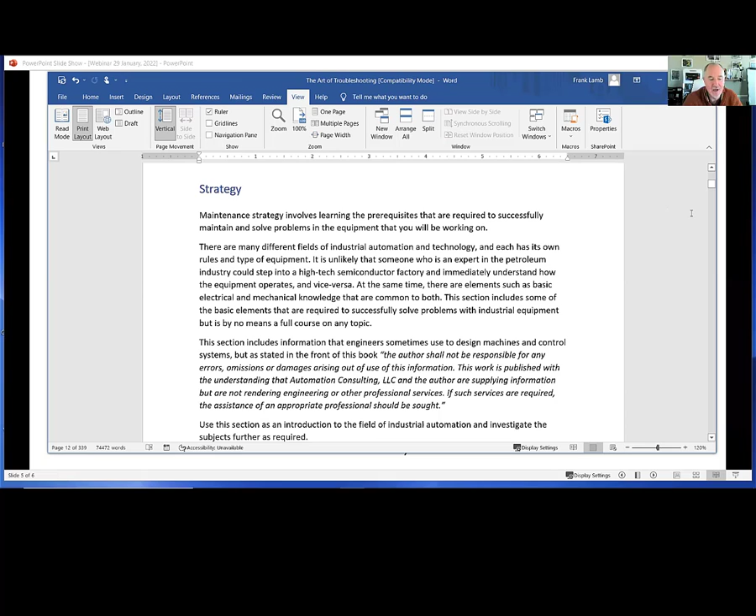Talk a little bit about maintenance strategy, learning prerequisites that are required to successfully maintain equipment, which a lot of people will already know. And I'll say, well, if you already know a lot about this subject, skip ahead in the book. There'll probably be something else in there for you.

I mentioned, of course, this is if there's errors, omissions, or damages arising out of the use of this information, not my fault, right? Don't use this as a Bible.

This talks about some of the different kinds of maintenance. Sometimes people work in a plant and they don't know how the management of maintenance and the systems work. So I described some of the acronyms that are used in maintenance. MRO, people hear that and they don't know that it necessarily stands for maintenance, repair, and overhaul.

A lot of the types of maintenance that fall under this are like preventive maintenance, corrective maintenance, predictive maintenance. Those are pretty easy to figure out just by the titles, right? Periodically inspecting and servicing equipment, planned or scheduled maintenance, condition-based maintenance — when there's a problem, that thing's leaking oil, let's go fix it. Corrective maintenance is when something breaks down unexpectedly.

That's probably what most people think of — hey, that machine's down, we got to go get it up again because they're losing $10,000 an hour. Talk about that. And then predictive maintenance, which has to do with this motor has so many hours on it, it's time to replace the seals or bearings, or service the bearings before it breaks down. So that would be another kind of maintenance.

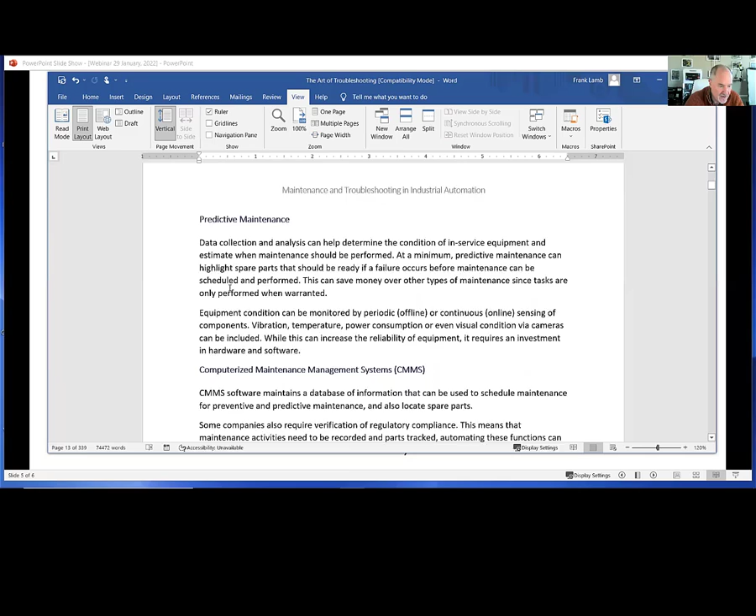So, and then I have, again, a little quiz, and I talk about CMMS systems. You can buy software that plans, schedules, all that. It's kind of neat stuff. You can go find those online yourself, right?

So then I ask, what are the three major types of maintenance? The answer is right there above you. So there's no real difficult questions in here. There are some calculations for those people who don't like math a little bit later.

Which is the most expensive type of maintenance, right? Well, that would be corrective maintenance, because when things break down, hey, your line's down, you're losing a bunch of money and you're having to replace something, probably with something else new, right? And then what kind of software can be used for that. So very general stuff there.

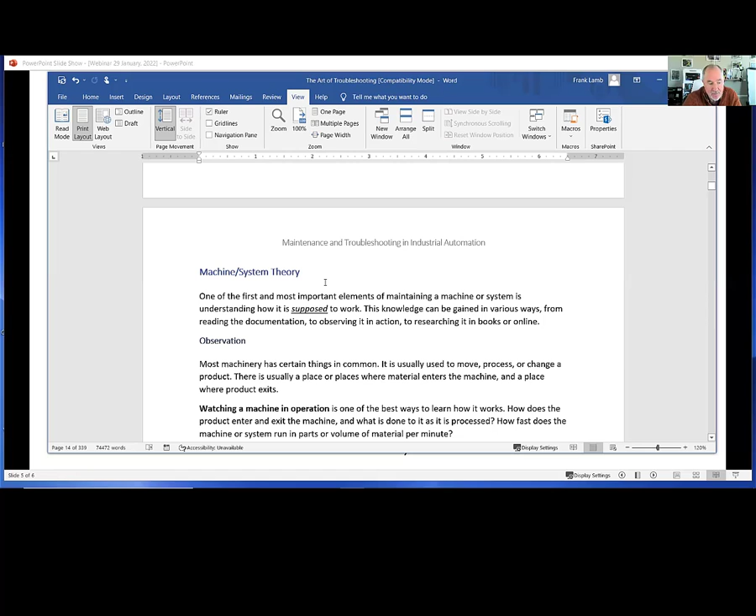The machine and system theory — this is kind of looking at a machine and telling what's wrong with it. And I would even go farther to say, a lot of times you can look at machinery and tell what it does. This week, I had an interesting experience.

I was called by a company about 500 miles from here in North Carolina. And they had a guy who was their Siemens expert, and he actually died of COVID, believe it or not.

So they suddenly had no Siemens support, and they had a machine that really needed work on it, maintenance and upgrading and that sort of thing. This guy had been involved in it, and suddenly they didn't have anybody to do that. So they called me up. I went out there for 3 days and we worked on that machine.

We did a lot of Siemens training. And I didn't know how the machine was supposed to operate, but you can go look at it and you can tell a lot of things.

In this case, there were trays and these little aerosol containers, and it just palletized all the aerosol containers. Turns out what they do is they palletize the aerosols after they make them. They put them in a warehouse for a week and make sure they don't leak. Bring them back, test them for leaks, run them back through the machine, repalletize them, put them back on trays, put them back in for another 2 weeks, rerun it through the machine, test it for leaks again, and then it's released to the public.

So at the time that all these little aerosol nose sprays or whatever come out, they have been through 3 weeks. It's almost like aging whiskey, I guess. It's kind of interesting. But this whole palletizer and depalletizer system, that's all that did - it's just a Siemens machine, and it put things on trays and took things off of trays.

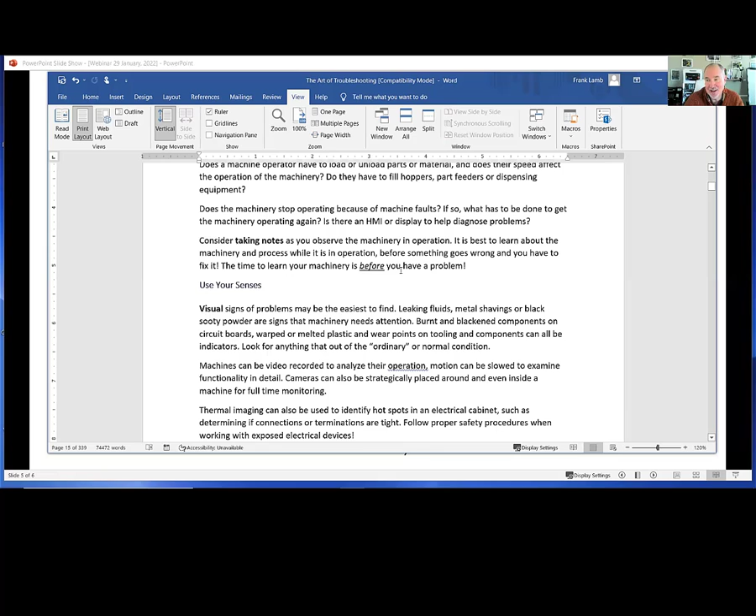Take notes, I'm a big believer in that. Write things down. The time to learn your machinery is before you have a problem, right? You want to watch it in operation before you ever get to the point where you have to fix it.

Visual signs of problems are easiest to find - leaking fluids, things like that. Thermal imaging is kind of a visual thing too - you point a camera at it and you can see where hot spots are. You can listen to machines, listen to the sounds they make - grinding, high-pitched squealing, those kind of things cause problems. Smells - you can smell burning rubber, you can smell burning oil.

So this isn't really meant to be a troubleshooting tip so much, but it is a, how can I check out the condition of the machinery? Very simple stuff. And I'm only on about page 16 here, and I think 5 or 6 pages are just table of contents.

Then I start talking about the products and types of machinery, and I go into much more depth on that later. Knowing about the product being processed - well, hopefully if you're working for a plant, you're going to know a lot about your own product, you're going to know how it acts in the machinery. And then I do cover later the classifications of machinery - I talk about packaging machines, robots, pumps, conveyors, material handling machines, things like that.

And then this exercise really - this comes from a lot of times when I do PLC classes, we have something that says, what do you make in your plant? What does your process look like? This is meant for the person to just keep records and answer themselves.

Sometimes we talk specifically about, hey, are you here to learn oil and gas processing, or are you here to learn automotive manufacturing, or are you here to learn chemicals or FDA validated pharmaceutical or medical device equipment? It's all different, they all have different rules and things like that. So this is, there's no correct answer for this. Are your products consistently the same, or can they vary depending on the process? Lots of interesting questions there, but this doesn't have an answer in the back of the book.

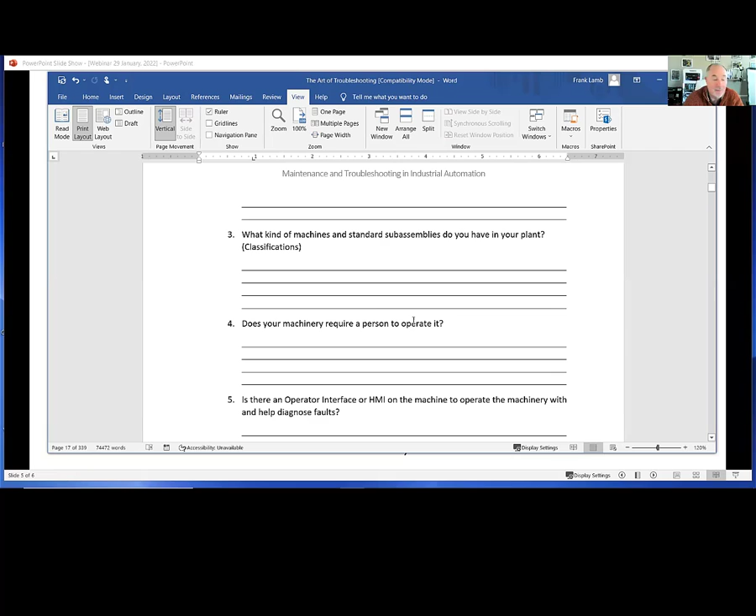You can't look up the answer to what your machine produces. Does your machinery require a person to operate it? Often, even if it's an automated machine, there is a machine operator there. So that's where we get into later, talk to the operator to get some of your information.

Do you have an operator interface or HMI? Do you know if that operator interface is an HMI or is it a computer? Because the implications of that are very different.

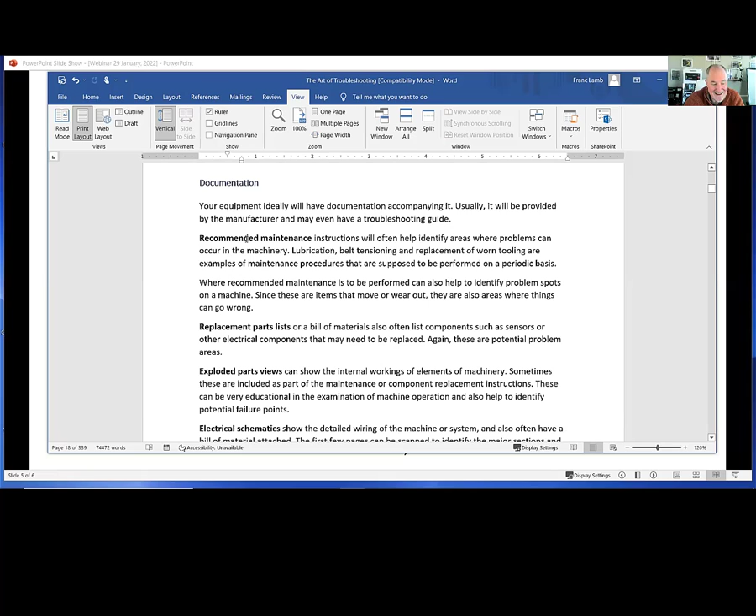List some of the characteristics of your machinery that can be sensed visually. Lots of stuff. Documentation. What kind of documentation would a machine have, and what can you learn from it? So that's what this is.

Talk about exploded parts views, replacement parts lists, P&IDs. I noticed that Dan Ryken's on here. I think he probably deals with P&IDs if he's in the process industry. PLC programs, studying that.

So I do go into more depth on some of these things, and again, there's no correct answer. What are some of the documents and programs you have that would be appropriate for diagnosing problems on your machinery?

Then I start going into some more technical things. What is a powertrain? What are some of the mechanicals, things you need to know, right? Power transmission, bearings, just a simple grease fitting kind of thing there.

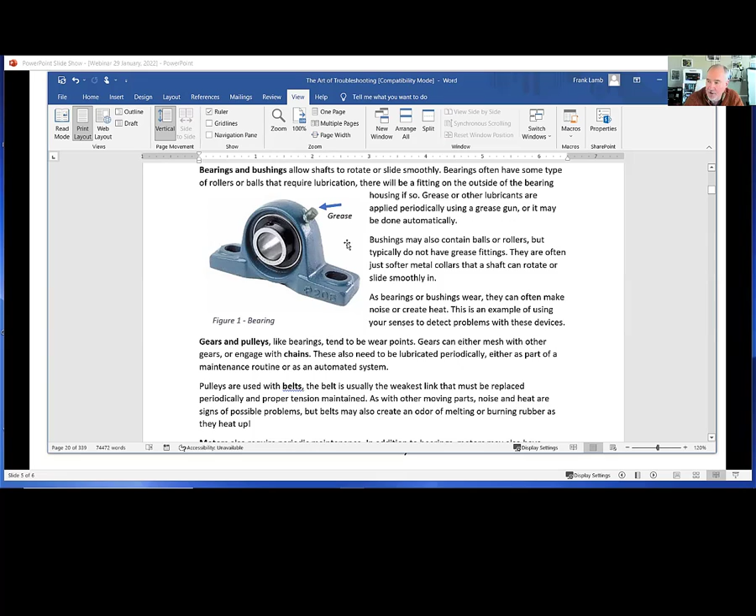Now, I'm not going to tell people how to grease a bearing, but there is a fitting here. You're going to learn more about that in the maintenance manual for your machinery. Hopefully it will show you how to do a lot of that. Gears and pulleys and motors, very brief stuff.

This is something I run into a lot, is broken couplings, right? This stuff I mentioned is generally inside of a housing, so you kind of have a hard time getting at it, but this is the cause of a lot of the problems I've run into: broken couplings, slipping couplings, your encoders will get off, and that sort of thing.

Talk a little bit about seals, clutches, mechanical adjustments. So this is very general. Ventilation.

Go into some of these things, and then have some simple questions, right? Some of the possible failure points in this blower picture, pop-up diverter. These actually do have a list of things that I put in the answers at the end.

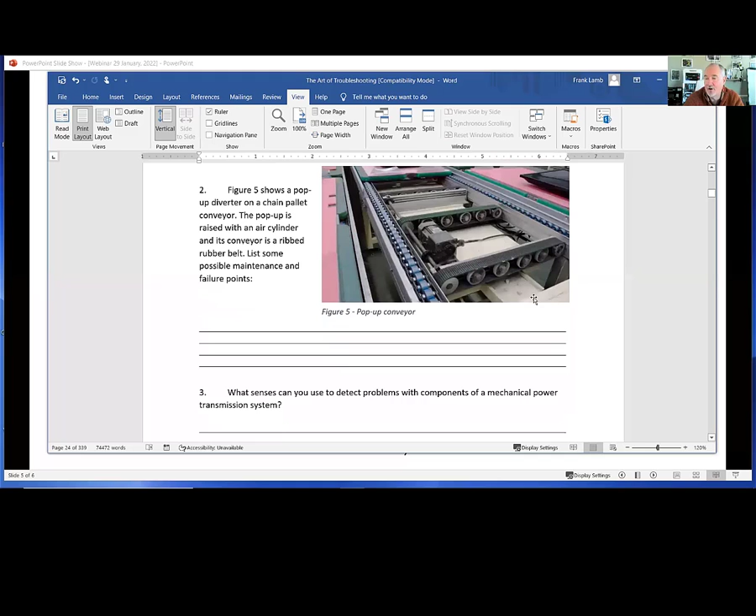By the way, it would take a long time to go through the whole book. This is figure 5, and there are now 300 and some odd figures in this book. So this goes on and on and on.

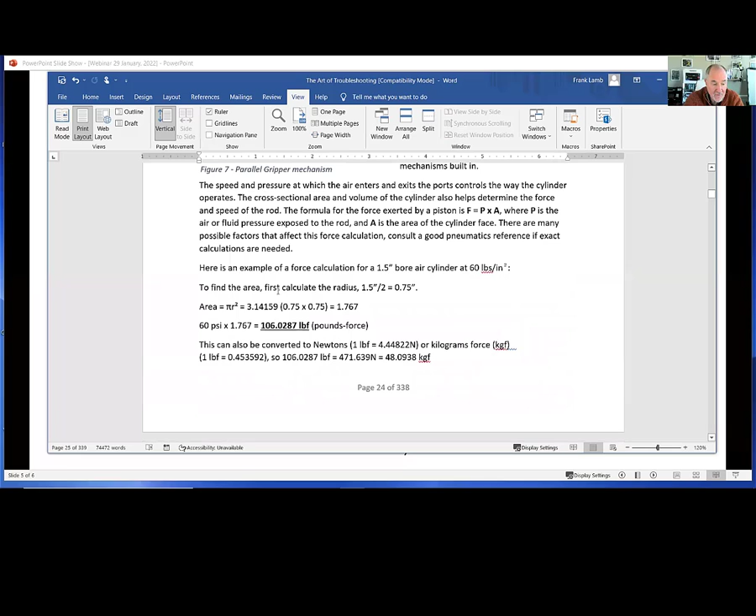And then I start getting into pneumatics, talk about some of the mechanisms in the pneumatics, do some calculations, how to calculate force. Most technicians don't necessarily have to do this, but this is a design help thing, right? Calculate the force for a...

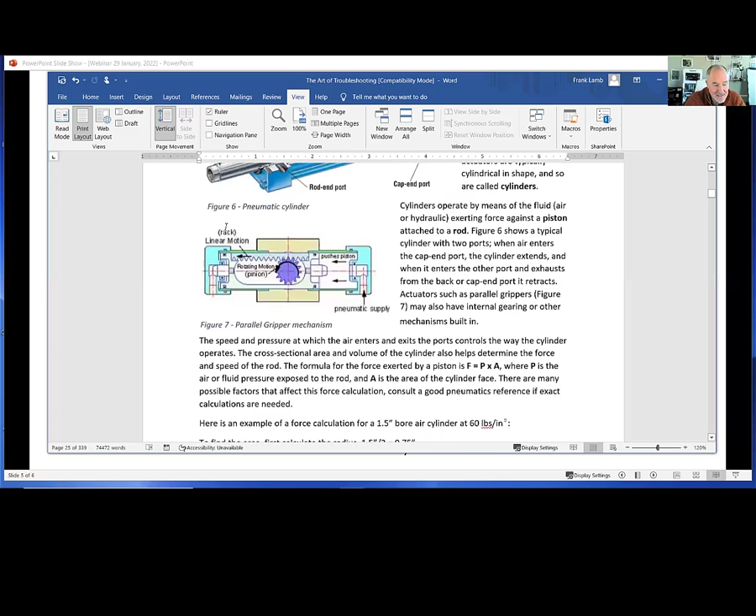A 1.5-inch cylinder at 60 PSI. It's just F equals P times A, but there's more to that than that—you have to calculate a lot of things. There's pi in there because the surface area is round, and you actually have to subtract the surface area of where the shaft joins the piston. I kind of mentioned that in passing here, but I don't go into great detail because, again, it's not really a design class.

Talk about flow controls, put some helpful things in here, talk about the symbols for different things, mufflers. I had to stick that here at the end. This is actually from one of my previous books. This is an easy way to read pneumatic symbols—kind of a tutorial on it. What do all these different things mean?

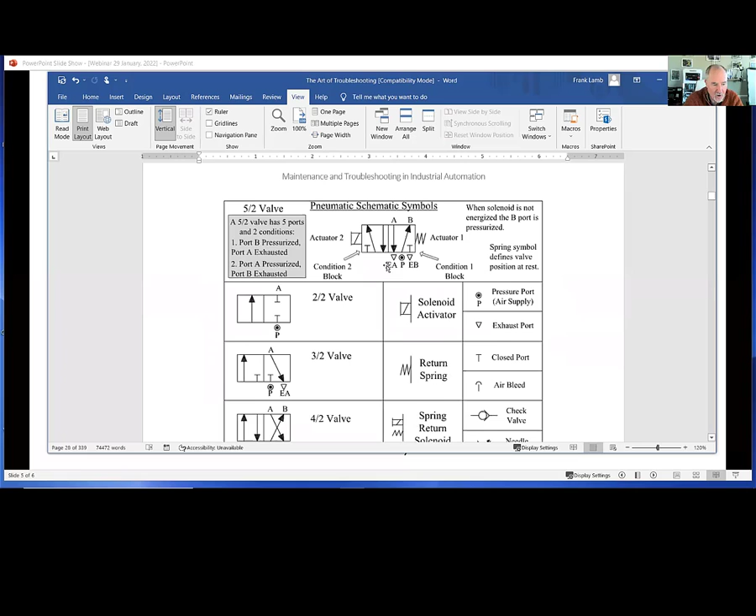I go into a little more depth and actually show how these things move back and forth across. I've made videos about these before, what these arrows mean, what these ports mean, right?

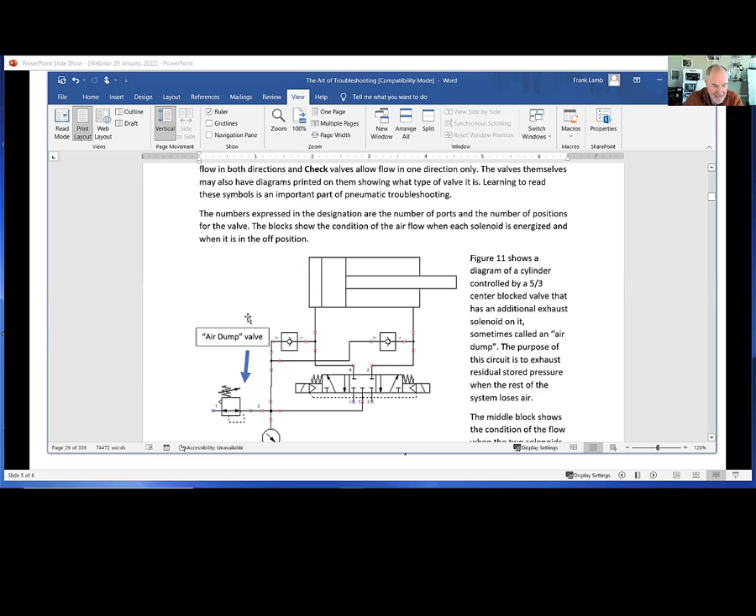And then there is a more in-depth pneumatic diagram that I plan on putting in the back. And then here, this is a simple diagram that uses a valve, and you can kind of talk about how this shifts back and forth and energizes some of the different ports. So, lots of pneumatic stuff.

I actually have a physical picture here, talk about what the different parts are, shutoffs, filters. I go into great depth on the specific machine that I use as an example for troubleshooting at the end of the book.

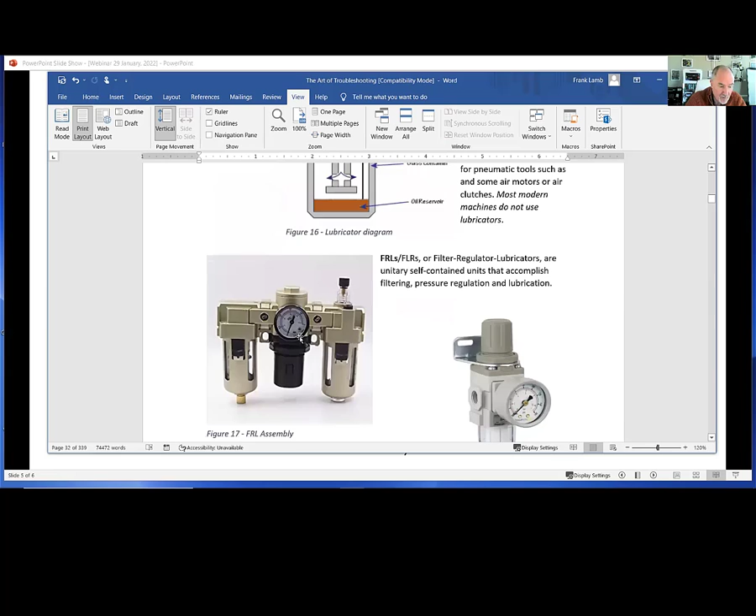Talk about filters and regulators. Sometimes people don't get this in college. Lubricators—I mentioned the fact that we don't use a lot of oil lubricators anymore because it just really cruds up your air system, right?

There's a lot more of this available online. You don't have to take this as everything, but I do talk about all the different things that might require attention. I'm going to kind of breeze through more of this.

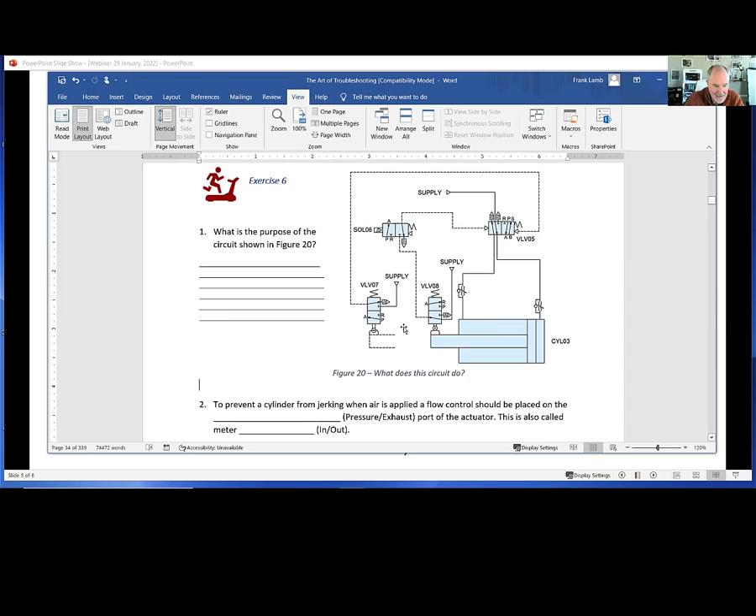Then some simple questions here. What type of valve might be used on this pusher cylinder? There's several right answers there. Talk a little bit about safety, make somebody do a calculation.

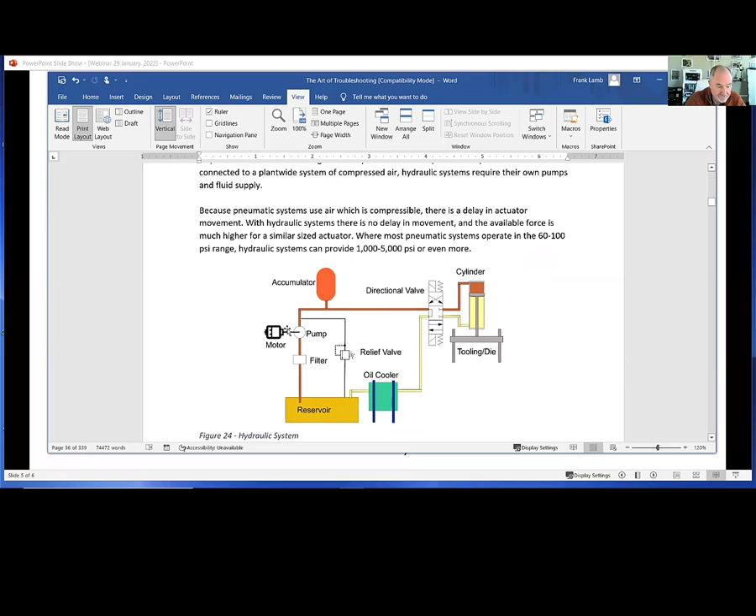I do the same thing for hydraulics. I actually looked online for a good diagram for this. I couldn't find one that had everything I wanted, so I had to draw this myself. The ones I found a lot of times didn't have an oil cooler in it. So this is a kind of a sample of a lot of things you'll find, but people who are hydraulic experts will find other things to put in those systems also.

So talk about lots of that, talk about the difference between hydraulics and pneumatics. Why would I use one over the other? What's the biggest cause of failure?

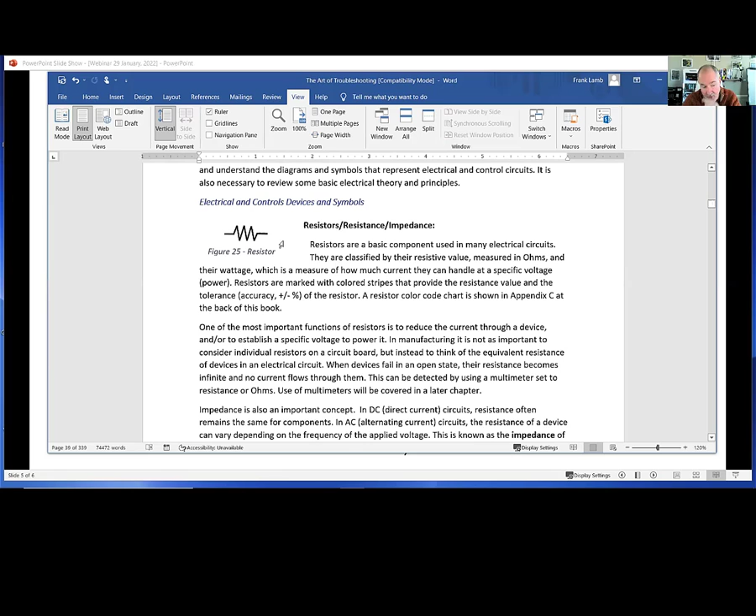Then I go through electrical. The reason I put some of this stuff in here is because sometimes I get people in classes that haven't had electrical training, and I need to at least put the basics in here and how resistance and some of that stuff works. You can go in here and, of course, get a lot more in-depth training, but I want people to understand what the symbols are. And if they're straight out of high school and haven't had electrical training, this will give them a start.

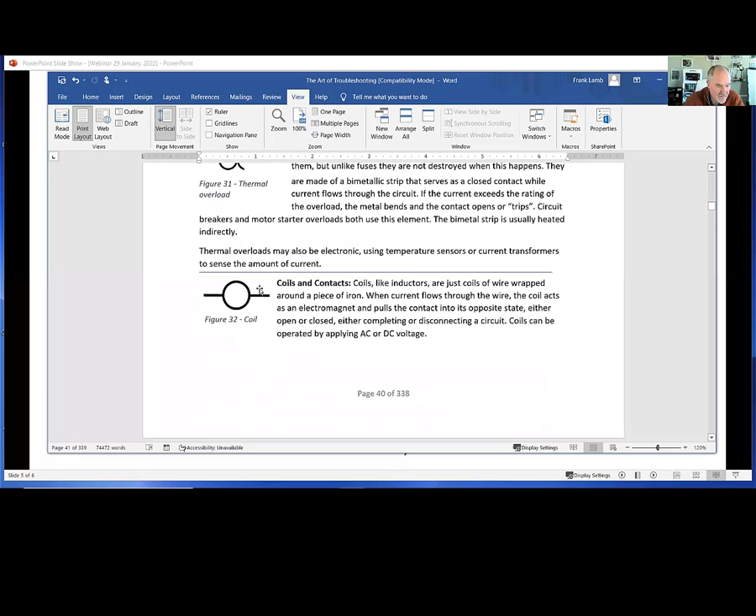And I do, again, some very simple calculations and things here a little later, showing people some of the symbols they would find in electrical diagrams for solid state devices, things like that.

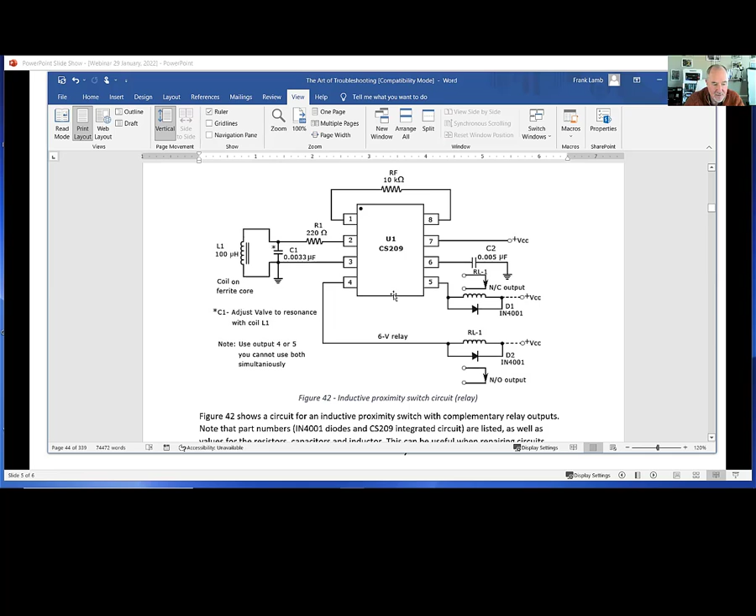Chips, right? This is actually an inductive prox. People don't realize there's actually a little processor in a lot of proximity switches. So this thing just does some switching, and you can get very complicated for some of those little circuits.

So again, another little test. I think there's about 40 exercises in here. Go through basic electricity calculation, series parallel, without going into great depth. Again, it's just meant to be a quick tutorial.

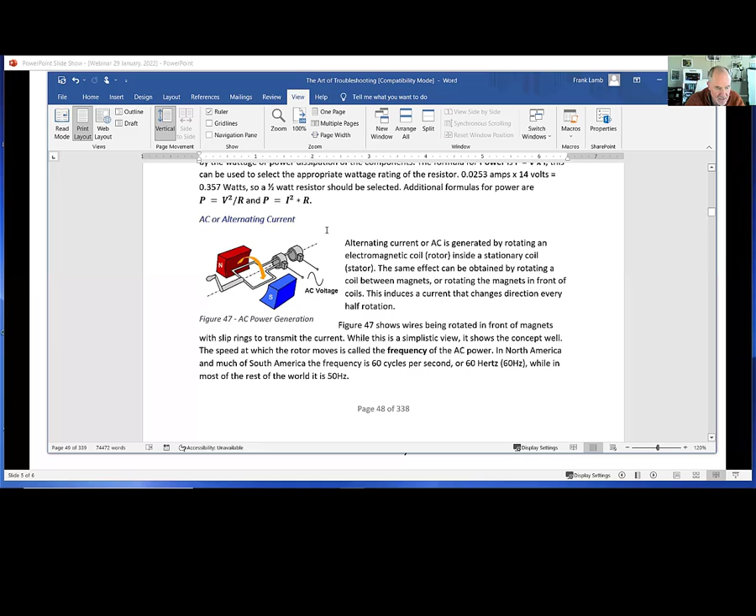Go into AC, explain what that is. Talk about 3-phase power, explain what that is. Explain the fact that when you get a voltage on AC, what you're getting is the effective voltage, not the peak voltage. So you can actually have much higher voltage at the peak of your electrical circuit than you're actually reading. But your meter is going to say 480 volts or whatever—that's the effective average voltage across those phases.

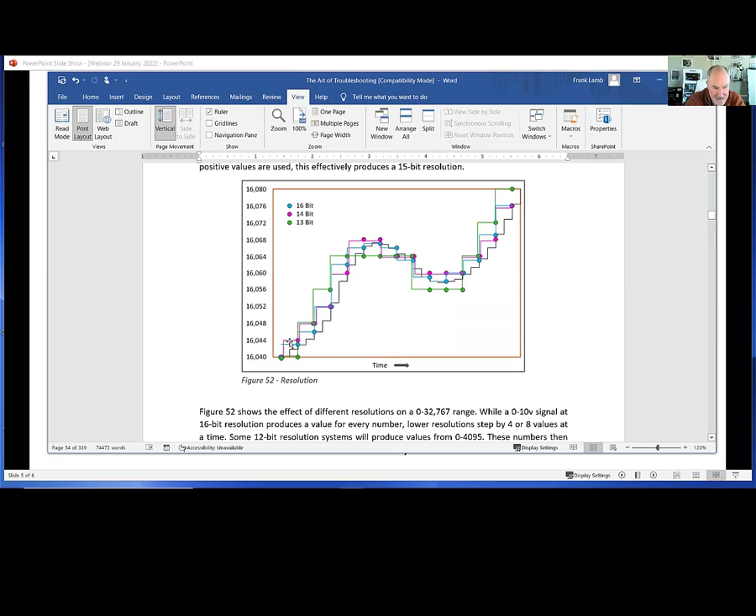Then I go into digital and analog, which probably most people already know. This is, again, out of my PLC book. I talk about resolution—what does 16, 14, and 13-bit resolution mean? In most cases with PLCs, it means the values will jump by 4 or 8 or something like that for each increment. It'll go to the same value of around 32,000 something, but it may jump by little increments, and that's what the resolution means.

Talk about RS 232, 485, things like that. There's a pretty good, I do serial here, but I also do a pretty good Ethernet model in here. I went into a little more depth on Ethernet than I have in my previous books.

Talk about a lot of the different things—what are all these things? What is a NIC? What's CIP? What's a hub or a bridge? Some definitions. Talk about IP addressing, class A, B, and C networks, how those are built up. A lot of times people type in their IP addresses and they don't know where all this comes from.

Talk a little bit about industrial protocols like Profibus. Mention pinging—sometimes I mention somebody needs to go ping something and they have no idea what I'm talking about.

What time we got? About 35. What else we got in here? I'm only less than a quarter of the way through the book, so I'm going to get to some of the more fun parts.

Lots of stuff on numbers, right? We need to know BCD and things like that, data types, double integers, etc.

Talk about devices, relate the physical device to the circuit drawing for it. Talk about sensors, right? I've kind of skipped ahead here, but talk about proxes, how they work, Hall effect sensors, how are they different than a prox, the different kinds of photoelectrics.

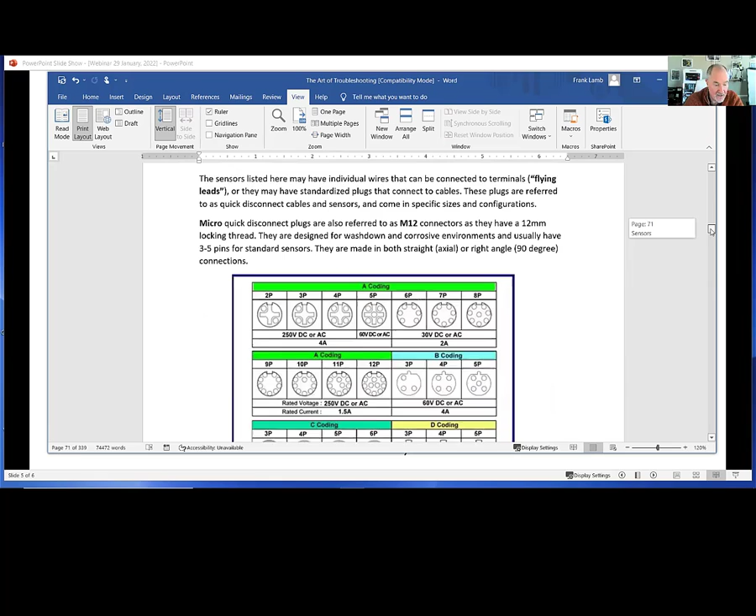M12 connectors, some of the different sizes. I kind of threw this in here at the very end. Talk about M12s and M8s and what the different configurations are. Can't just buy any M8 cable and expect that it's going to mate up with your prox switches and things.

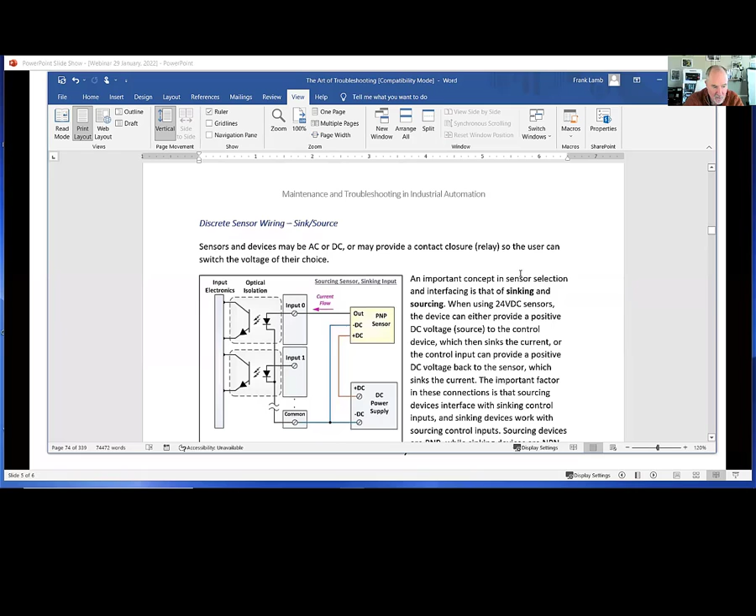And then lots of questions, like what's the most reliable type of sensor, that sort of thing. Talk about the wiring, right? This was out of my old PLC book. What is sourcing and sinking?

That's always very important. Special purpose sensors went into LVDTs and load cells, thermocouples, a lot of different kinds of things in here. There's a nice multiple LVDT picture. This was a project I did a long time ago with LVDTs measuring something.

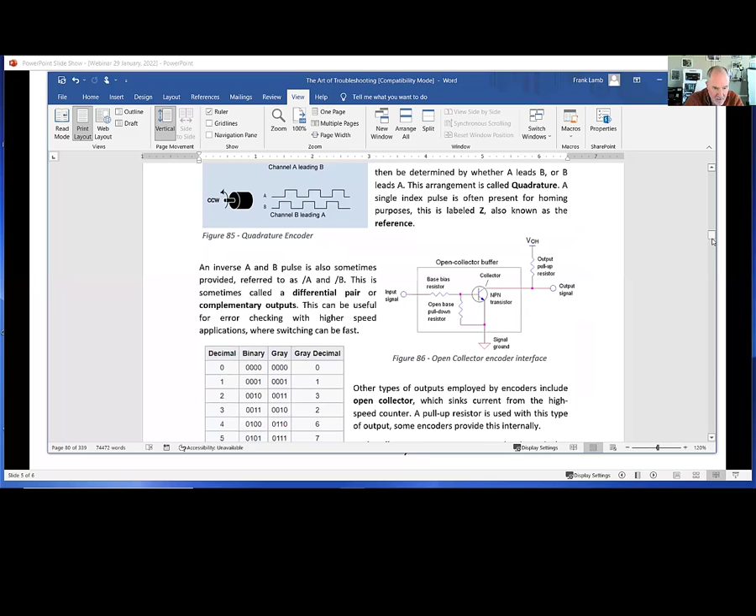Encoders, how do encoders work, quadrature, etc. This is a resolver, which is sort of like an encoder. Barcode readers, go into that a little bit. Then I start getting into, I think, machine vision somewhere in here.

Talk about sensor troubleshooting, barcode troubleshooting. Probably having a known good part, I mentioned that at the end of the book. I go over troubleshooting itself for quite a bit.

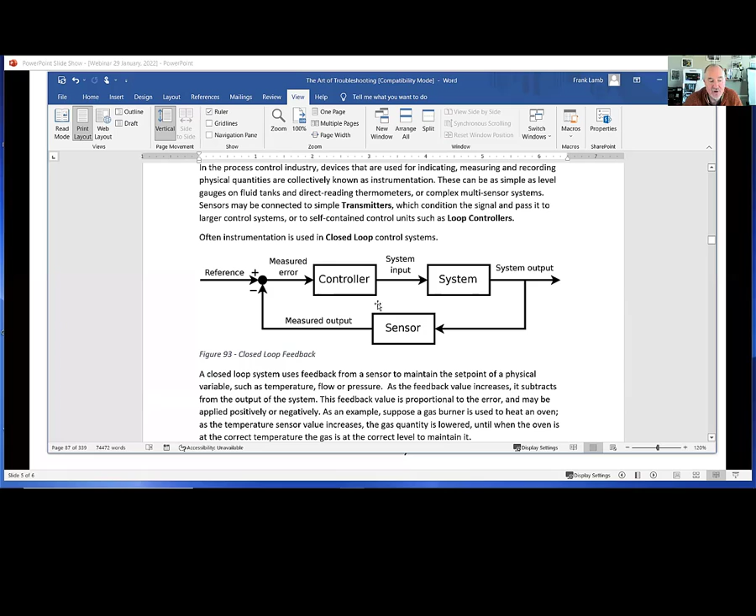Instrumentation, I kind of stuck this in at the end because even though there are a lot of I&C books out there, for people that work in the manufacturing industry, they need to know what instrumentation is, what an instrumentation technician is, which is not what most people are when they go into an automotive plant. They don't know what an I&C person is. They don't use these loop controllers. They don't use flow transmitters and things like this. They use more discrete manufacturing things.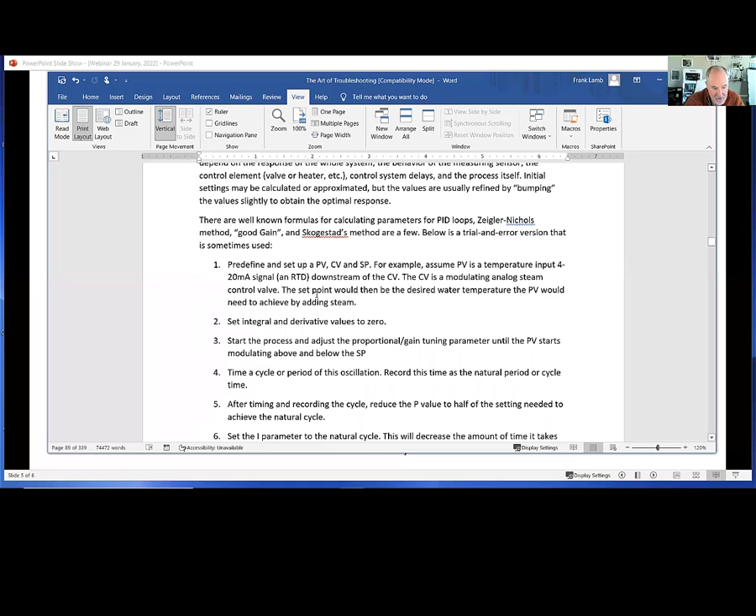So I go into more depth on PID, how to set up PID. There's a couple good tips in here, how to start out to figure out how to set your parameters. I have two different methods of doing that in here.

Modifications to parameters, what they mean. What is a closed loop system? Very basic stuff. Go through P&ID. Sometimes people hear P&ID and they think I'm talking about a PID. No, that's a different thing, right? Piping and instrumentation diagram. This doesn't cover everything about these, but it does give you the general concept of what a lot of these letters and things mean and what a lot of these shapes mean. You're going to see these.

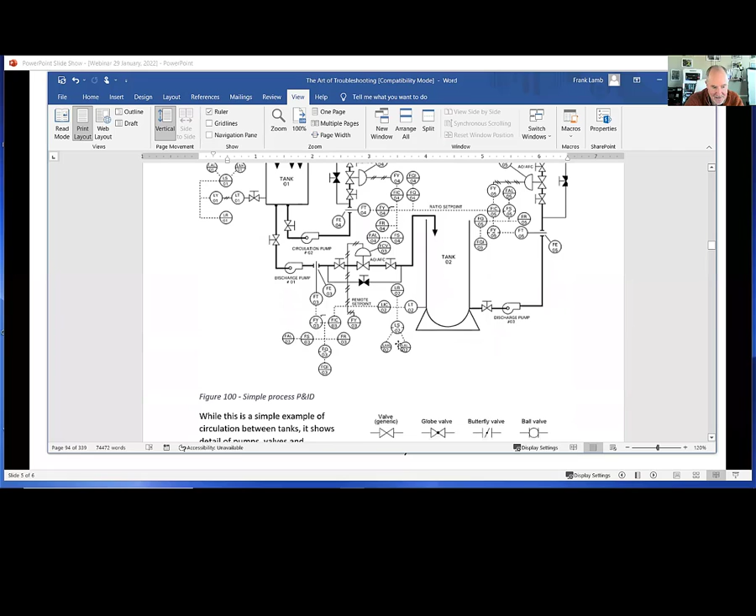And then I give a couple examples, right? There's a very simple one, just a tank filling another tank, with a bunch of little symbols on it. Explain what some of those things mean. Valve symbols, some very generic stuff.

This was machinery that we built at Wright Industries that was actually not process control, but they forced us to write P&IDs for machinery, which was very unusual, right? You didn't have symbols for a lot of these things, so you just drew a big box. This took mortars, took the nose cones off of the mortars, and extracted the energetics, actually drilled a hole in the little nerve gas containers inside. So as you can imagine, human beings can't go into this machine. This all had to be done automatically.

Safety systems, now this I went into pretty good detail on. I went category 1 through category 4 safety systems, talked about the performance levels and how people classify safety systems, talked about the history of where a lot of these things came from.

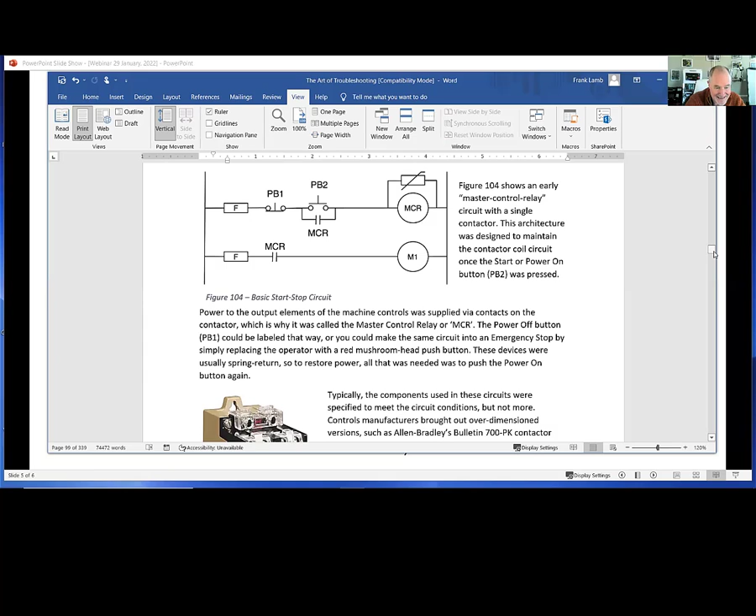We used to use MCRs like this, and you can't do that anymore. This is an old single channel, and in the 90s, this was what I dealt with. You didn't have dual channel systems back then. Then they came out with self-monitoring start-stop circuits with interlocks and things.

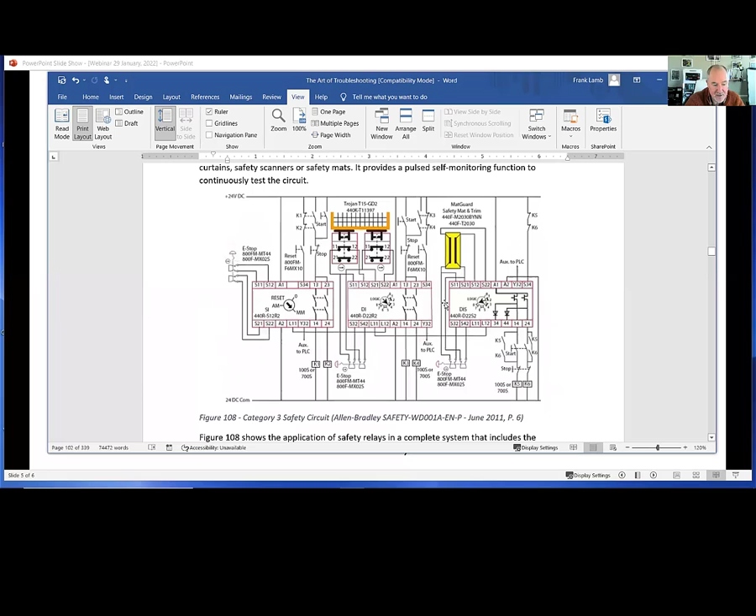They were still single channel, and then they started getting into dual channel, category 2. So I did some of the basic diagrams here, then showed a category 3 system with guards, and I go into much more detail on this at the end.

So I'm going to show you kind of at the end here. I will probably skip ahead a little bit. Category 4, talk about what those are. Safety system components, some of the different things you'd see, direct opening, interlocking, input components, etc.

More on category 4, dual channel, right? Ask lots of questions about it. And then, like I said, there's a lot more on this at the end.

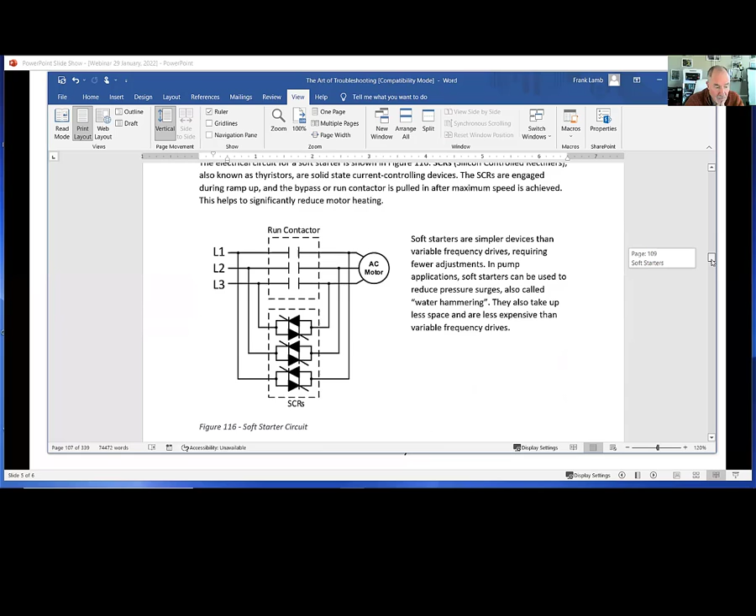Motor control, starters and overloads. How are they wired? Go through just some of the diagrams and things. This is a soft starter, right, this is something that brings the current up slowly rather than just slamming it in.

Then I get into a little bit into VFDs and how that works. I use a PowerFlex 40 as my example and go through all the wiring of this.

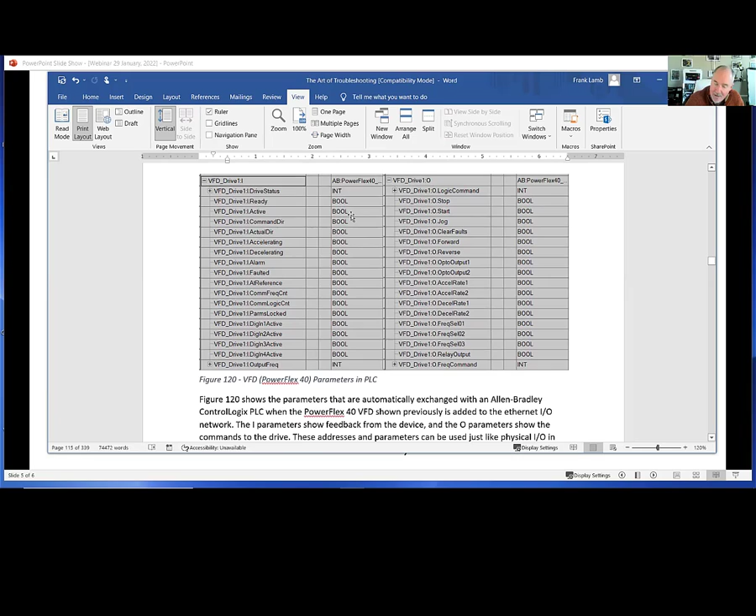Go into how the PLC commands directly control this, because a lot of times you don't wire your controls into your drive, you just use commands. You'll use Ethernet IP or something, and then there's a physical drawing of the front accessible controls. You can just push the buttons on them. And we may create an exercise using all this that people would do hands-on for that.

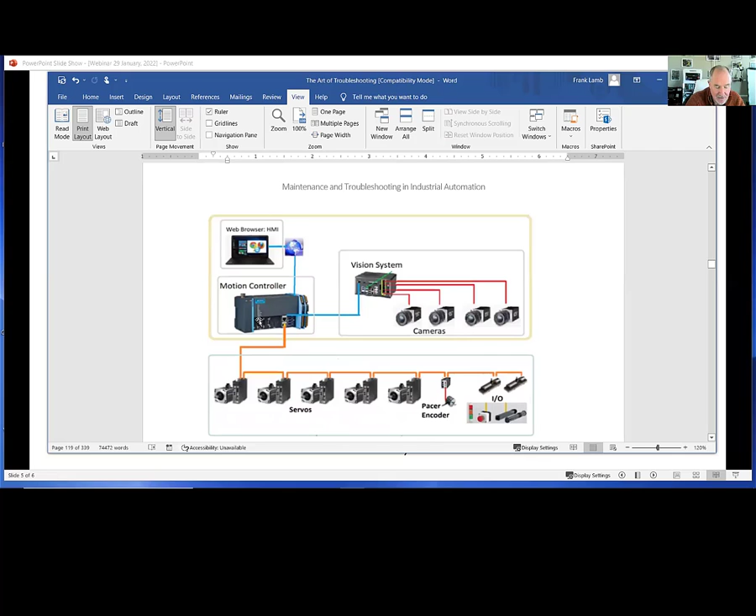Then I get into motion control, right, servos, that sort of thing. And you can see this is kind of building, getting bigger and bigger. And then I combine the servos together and make a system out of them. Sometimes vision guided servos, coordinated motion, and then cover robotics a little bit.

So you can see this is kind of a general book covering a little bit of the details of a lot of general subjects. Talk about a work cell here and how all these things have to talk to each other. There's not like a single controller that controls everything. It all has to talk to each other.

And then we're getting into the fun part here pretty quick. Oh, machine vision, I do a very simple intro to that. And this is meant actually for plant managers and people like that who don't understand what machine vision is. They think you magically put a camera on something and it inspects it and it passes or fails it. This goes into a little more detail. I was kind of proud of this when I came out with it.

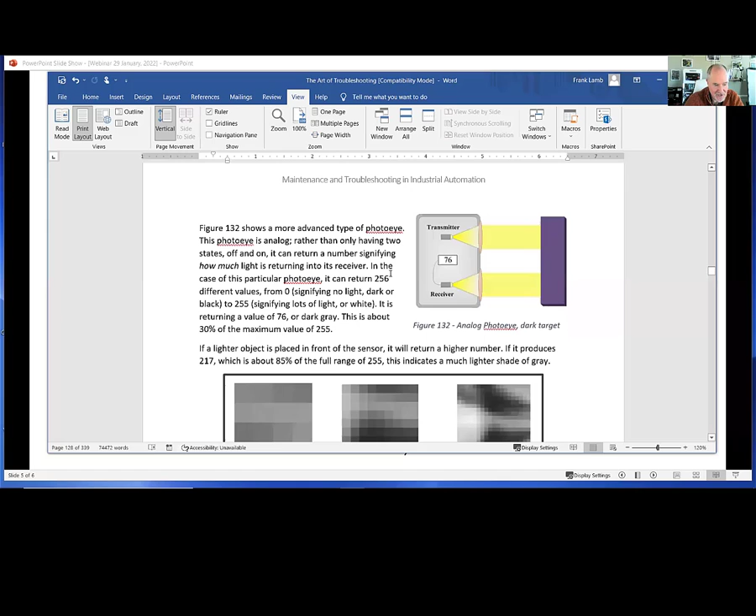It just puts things in terms of having an analog photo eye and then multiplying the photo eye across many, many pixels, right, this is the way vision works. You can see here, there's just a little piece, there's a little farther view, there's a little farther view, and by the time you get done, you can see that we're just looking at this little junction. And this is actually what they call the region of interest for this.

So this is an old application I did to tell whether a cap was on here tight or not. And this was an old 640 by 480. Now vision systems have much more resolution. So that's the basics of it.

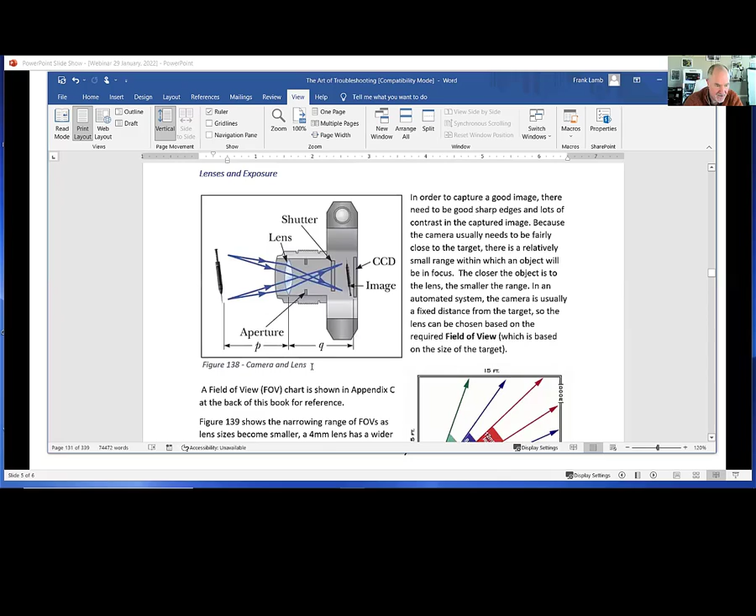Then I get into lenses and field of view, depth of field, calculations, parallax, a little bit on everything. And then I go through lighting, lots on lighting, different types of lights and the advantages they can bring in.

Different types of cameras, smart cameras. You may have seen these, Cognex, very famous for these. Processors with multiple cameras on them. Keyence is very popular in this area, or computer-based systems. This is, if you go to the vision show, you'll find a lot of this, like Matrox and things like that, computer-based systems.

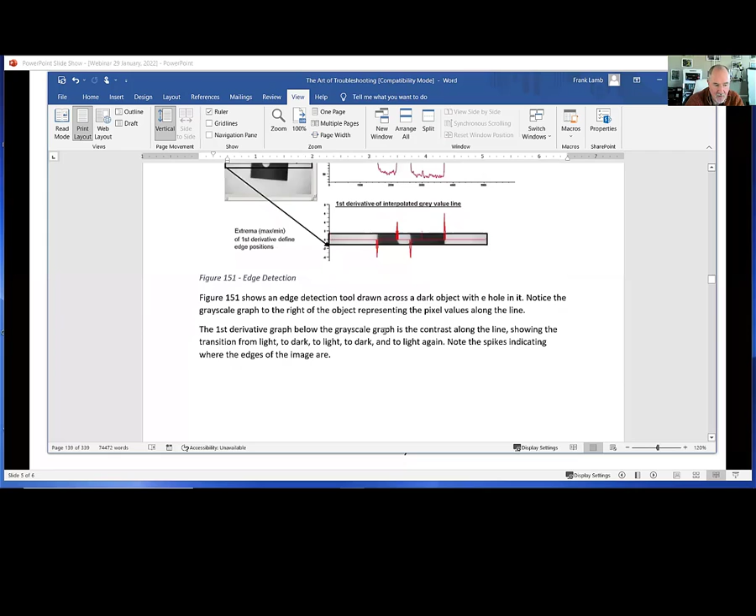Then I talk about pre-processing, the basic tools, how do they work? How do they scan across the images and pick up the pixels to find edges? Here's a nice finding an edge on a line, it's just looking for a light to dark transition across an area. Circular edge tools, same thing.

A little more detail on this, gets into a little more advanced vision, right? Finding blob tools, pattern recognition, optical character recognition. And then you would need to get the software, right, and play with it yourself. You can actually get Cognex's software. You can bring in images from other sources and simulate all this on your computer.

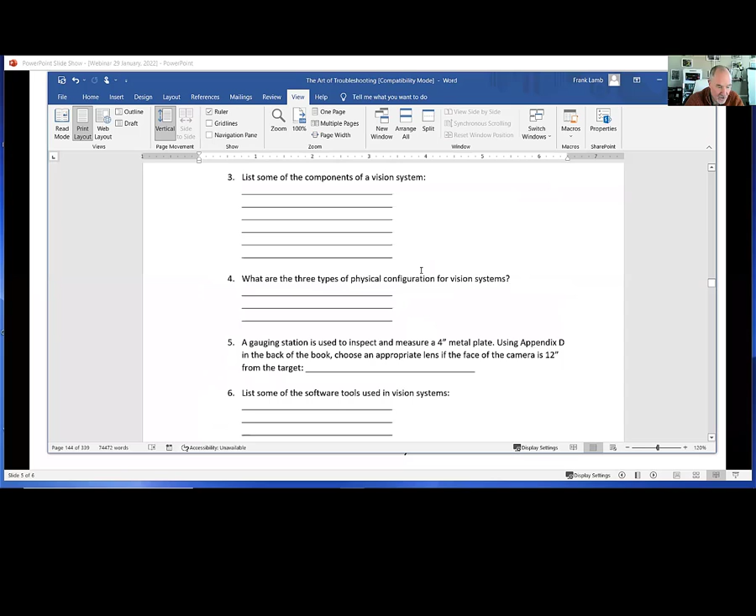I mentioned this is probably the most important thing. Your machine vision system issue is almost always some kind of change in the image, which means either lighting, or maybe the camera got moved, maybe the object itself is not where it should be, lens focus, right? So these are the things you're looking at. You're not necessarily having to reprogram your vision system. I ask those kind of leading questions in here, and people can answer all those. So that's a little bit on vision.

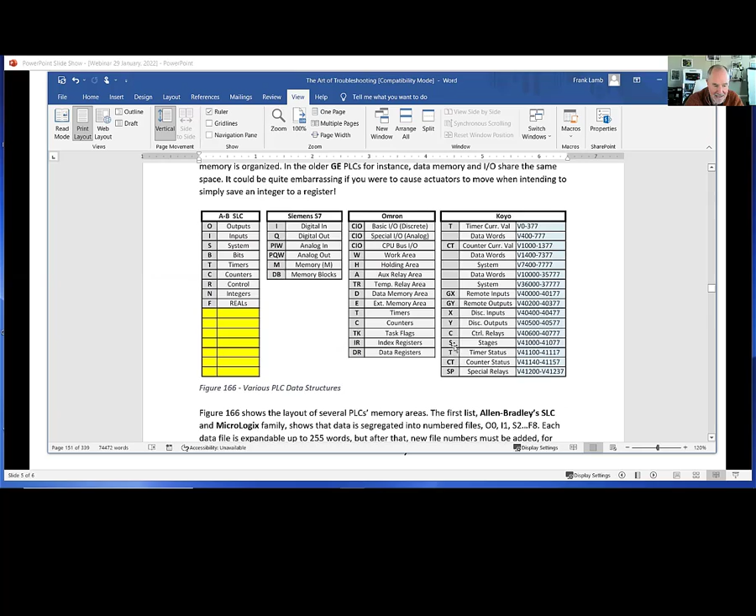PLCs is almost directly out of the old book, the middle book, right? So this is a lot of the stuff people would already recognize, how these sensors interface with inputs and outputs. I talk a little bit about various brands of PLCs, how the bits compare. Here's Allen Bradley, here's Siemens, here's Omron, and here's Koyo. Completely different addressing schemes for all of them. And this kind of goes on and on.

I did put a little bit of extra stuff in here than was in my original PLC book. I go over the 5 PLC programming languages. This is almost a dead copy of the original book, bits and symbols and that sort of thing. So you've probably seen a lot of this before, some programming exercises. And then I actually put some extra stuff in here.

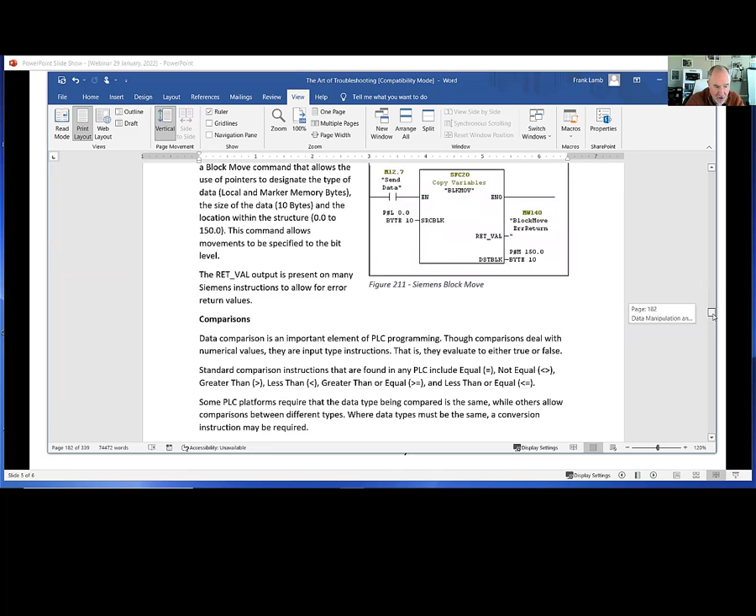I put a little bit of a bit shift from a bottle processing plant, and how is this stuff ejected, went into a little more detail about that. Describe what all the different types of instructions are. Gave some examples in Allen Bradley and in Siemens. Now there's, again, more on this as I get into the actual troubleshooting part.

So this goes on and on, more PLC stuff. Maintenance and troubleshooting of PLCs, forces, how those work, meant to be generic, like my original book was. And then there's a lot of kind of Allen Bradley-esque stuff here, right? I would say it's similar to that.

Then I get into machines and subsystems. This is, again, out of my PLC book. The different levels of system communications, machines and subsystems. This is where I get into describing what the different industries are. CNC machines, molding and forming.

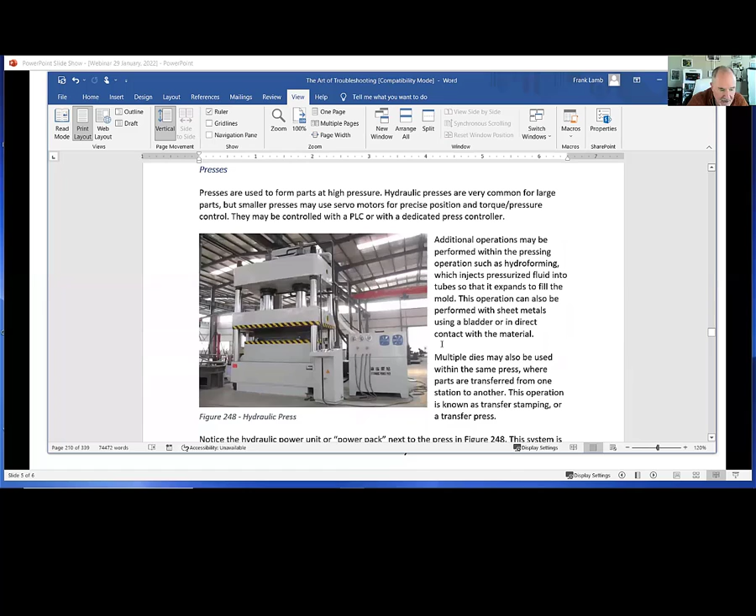There's an injection molding machine. There's a press, old press. Used to put my own controls on old Chinese presses, and a company would order those presses, just the body of it. And I would build panels like this off to the side of it, and we'd buy a Parker hydraulic system or something and put that in there and build hydroformers out of them.

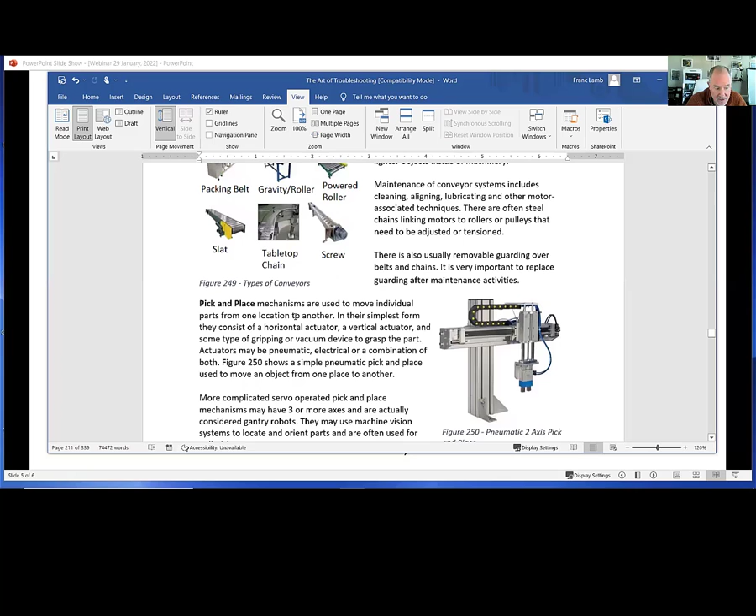Material handling, that's a very common one, right? Talk about pick and places and conveyors and maybe dial tables, things like that. Packaging machinery, different types. Talk about a whole system and how things talk to each other there.

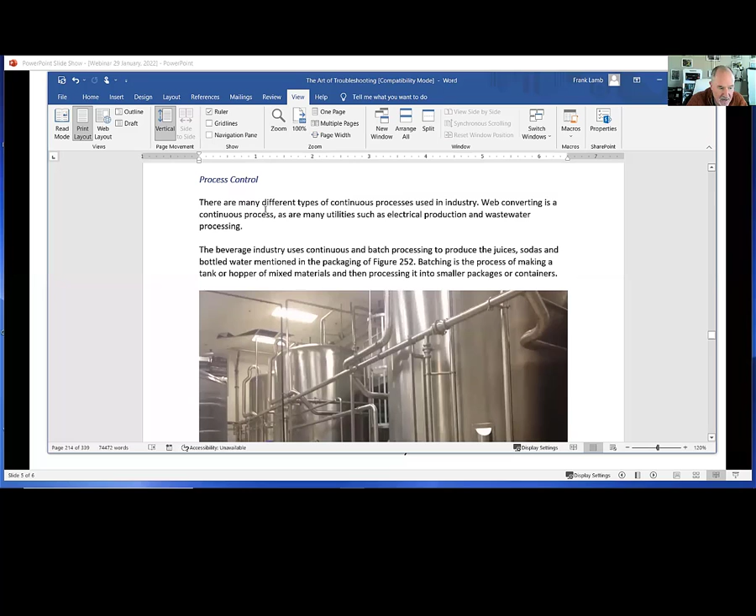Converting. This is another popular process control type thing. This is the plant that I work at down in Miami quite a bit. I've done some webinars on this, ABD. This is something that we did for the plant to block diagram everything. This is all the machines that are in there, how they talk to each other.

And a few more pictures of that for process control. Since I had access to the ABD stuff, and this is getting into a little more of what Automation NTH does, right? They do more high-tech stuff in clean rooms. So validated software, I had to talk about that, because a lot of times you can't change the code in the PLCs in these places. You have to kind of write the code ahead of time.

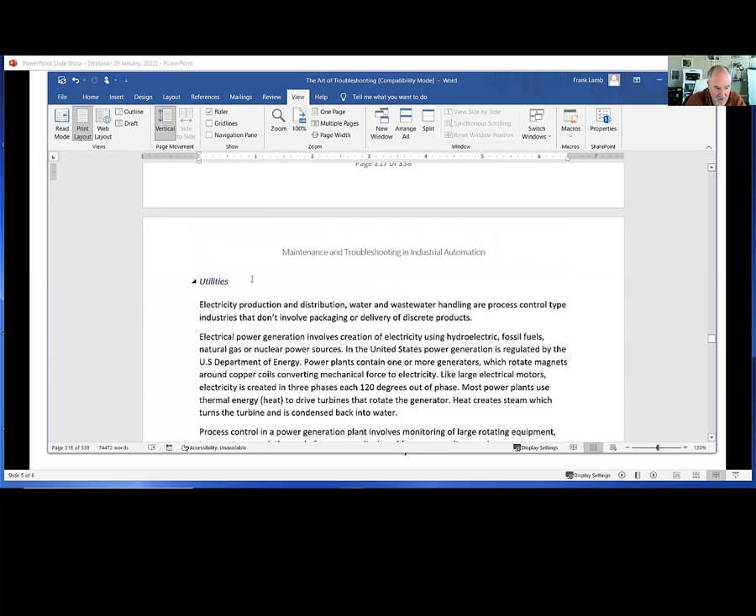And then last second, I thought, people like Stephen Gates do a lot of things in terms of PLC programming and utilities. So I went over a lot more on wastewater and electrical utilities. How is your power transmitted? What are all these stations? And this is where all the little PLCs and remote terminal units are in systems like that. So I decided to talk about what all the different substations are.

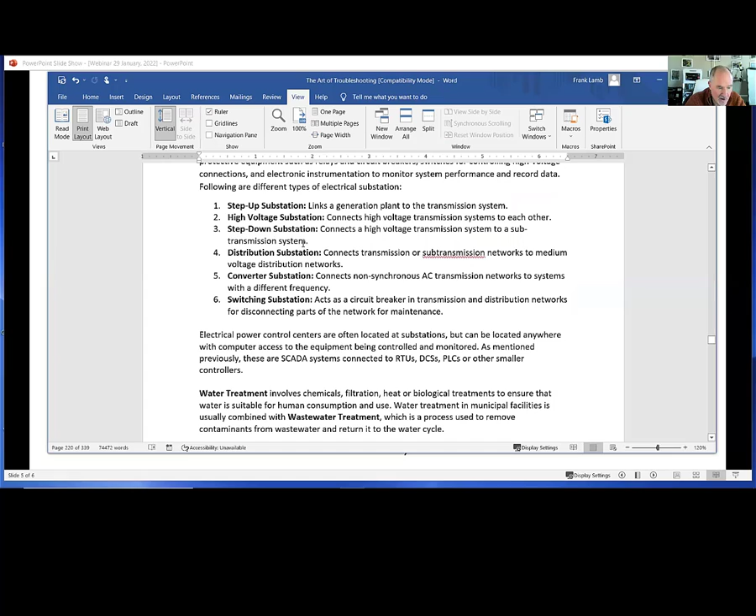Water treatment, same thing. How is water treatment done? What are the different stations in water treatment? Lift stations, things like that. So a lot of this is terminology, just explaining what things are. And then talk about a little bit about material handling, things like that.

Visualization, notification. I go into more depth on this later again, HMIs and SCADA. Animation, how you program things, what some of the different devices, DCSs, put that in at the last minute.

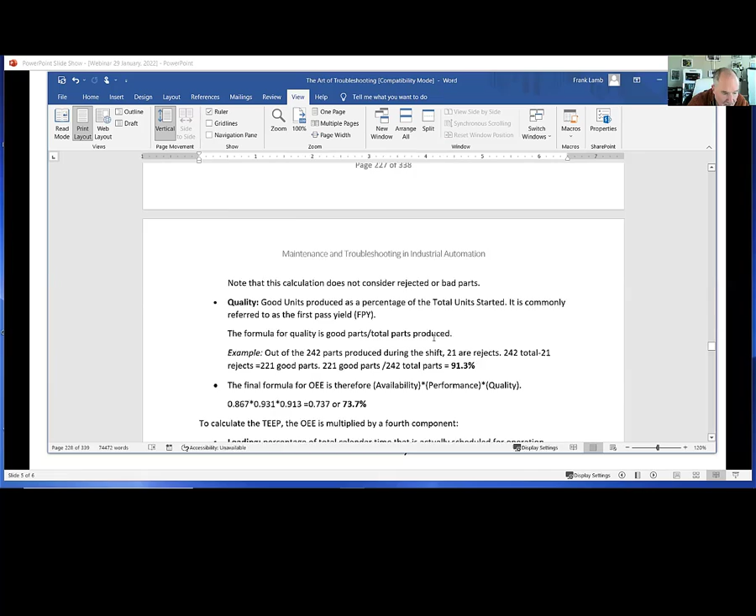Okay, and then we're getting into some of the meat here, I think. OEE, it's a lot of math, a lot of calculations there. 6 big losses.

And when does the meat start? IIoT, I threw that in there at the last minute because a lot of people talk about using that for Raspberry Pis and things like that. We've had some webinars on that, not really a direct training thing, just explaining what it is. I think I even threw Walker Reynolds a bone somewhere in here. IT, OT convergence, a lot of these terms that people are using now.

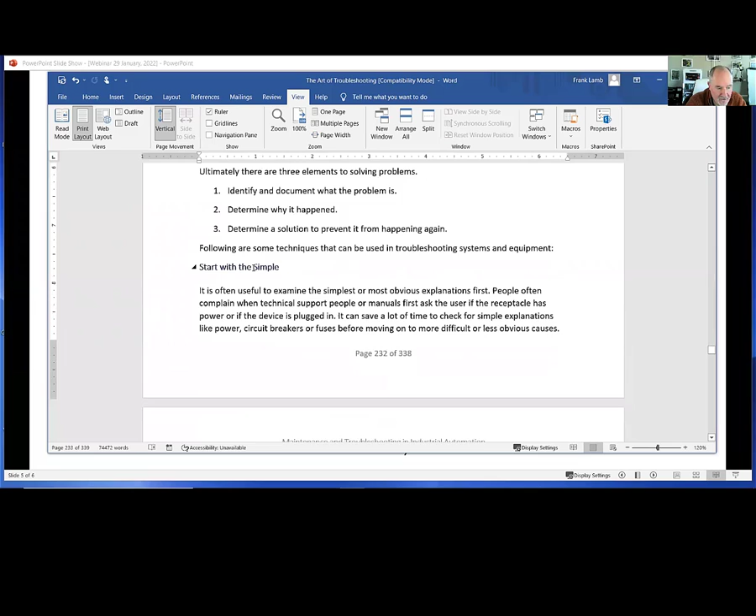Okay, tactics, troubleshooting. This is where I get into the meat of the troubleshooting itself. What are the different formal methods of troubleshooting? Start with the simple, begin from a known good state.

Some examples, checklists, split, half split method. I never found a good diagram, so I drew my own on this. Root cause analysis, this is a formal method for people that are into Six Sigma. Ishikawa diagrams, which some people call fishbone diagrams, so I called it a Fishikawa diagram down here.

So that was cute. Intermittent and multiple systems, talked a little bit about that. And then tools and techniques.

A lot of this, I kind of hesitated before putting this in here, but talked about calipers, the different mechanical things that you would use. Tools, hand tools, mostly hand tools, some power tools, drill bits, how they work, saws, Home Depot stuff, grinders, etc., electrical meters.

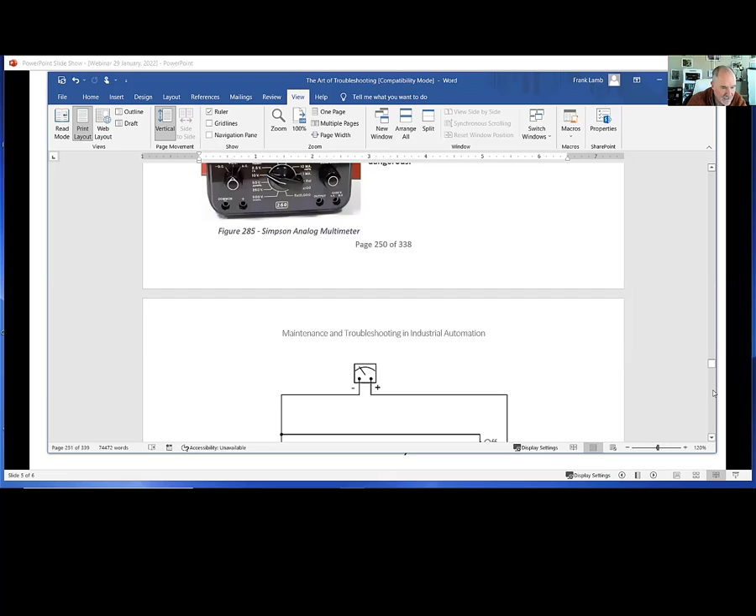There's quite a bit on this because when it comes down to it, that's what a lot of this book is going to be about at the end here. Talk about some other electrical diagnostic tools, oscilloscopes, spectrum analyzer. There's one of those thermal imaging cameras that we talked about before, detecting heat. So again, a lot of this stuff is available.

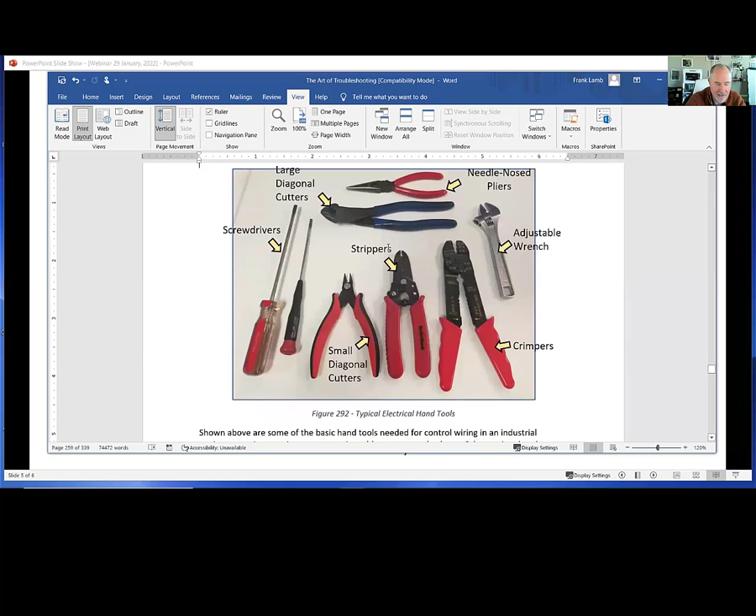I threw this in there because I had written a book on building your own control panel, building your own trainer, and I had this diagram in it. So I just imported it in and said, these are some of the kinds of things you need if you're an electrical guy, strippers and things like that.

And then put some of the better strippers in here, strippers and crimpers. Had somebody ask about this on LinkedIn the other day: what can people recommend for stripping 22 gauge wire? I can use these, I have it, there's a 22 gauge stripper on this. It doesn't work real well, it's really hard to hold the wire and pull it.

So a lot of these things are a little bit better, some of these kind of strippers here. These ferrule crimpers here, my wife bought these for $350 20 years ago. I think these things are probably $500 or more now.

And I went through some of the techniques, cutting holes for HMIs and things like that, pinging things and marking things for panel building, knockouts, Greenlee knockout kit. This is the end of my ferrule crimpers, right? So this thing here is kind of ratcheting.

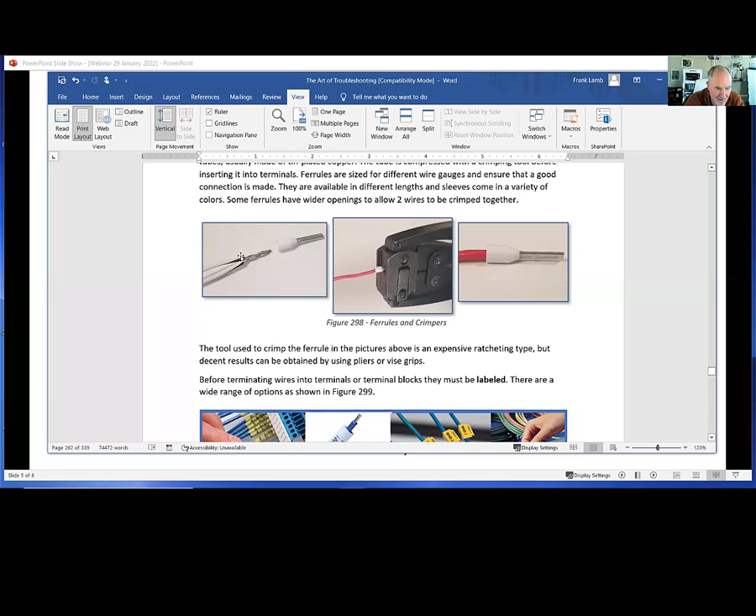Talk about how to twist this, stick it in the right size ferrule, crimp it, marking, labeling, some of the different markers and labels you can get.

And then this is where it really starts getting kind of crazy in here. I started using the example from a specific set of drawings, the Sweet machine. This is a trade show demo. This is the one I was talking about that has a lot of safety PLC stuff.

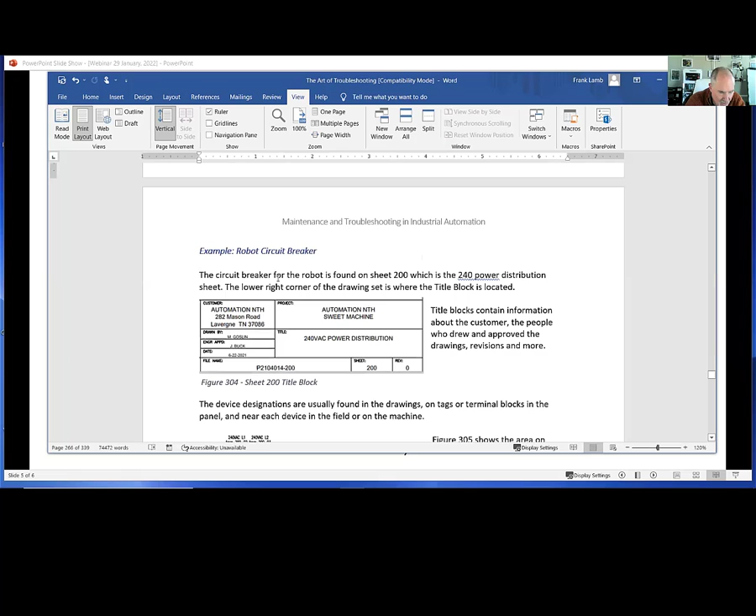And so what I do here is relate, talk about the numbering, the circuit breaker, go to the physical circuit breaker, talk about the labeling of that, relate it to the schematic diagrams, then show the layout in the drawings, talk about what page everything's on, and it just kind of evolves from there. This is the whole drawing package.

And then I start getting into what the actual machine itself does. There's the disconnect. And it turned out when I started taking this machine apart, they use a lot of IO link, so these are kind of neat, I had never seen these. These are DC circuit breakers, and they're IO link controlled.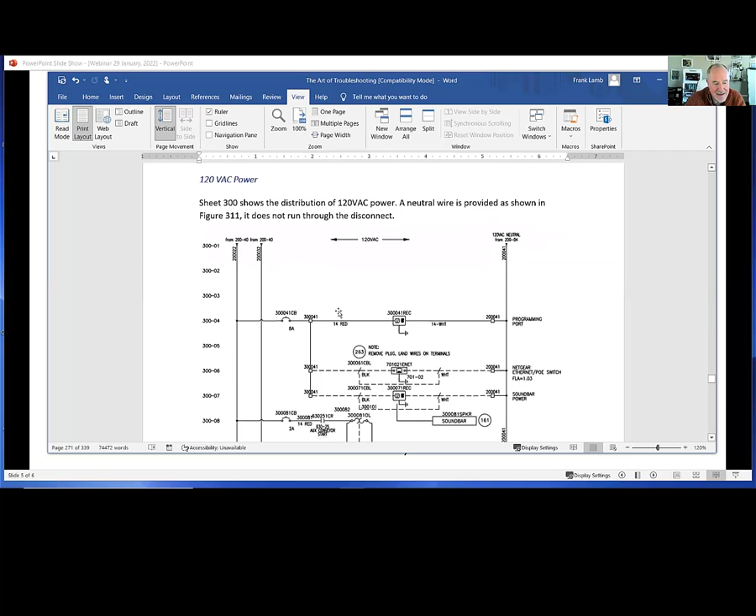And so when you trip a breaker, you get more than just the fact that the breaker's tripped, you actually know the current that was going through there. It uses communications to go to the IO link master. And I'm using actual cuts from the schematic diagrams to explain how all that works.

So here's just the power section. But as you go on and on, I start talking about communications to the IO link master, and then the IO link master going to some of the other devices.

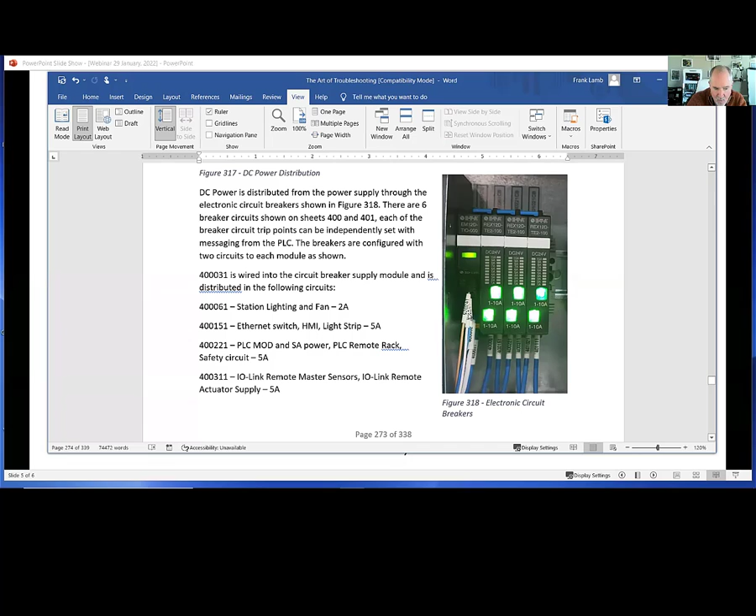And these are up under the front of the machine. This is the master on the left. There's the electronic circuit breakers, nice close up, all IO link. So there's only one connection to these circuit breakers monitoring everything using IO link communications.

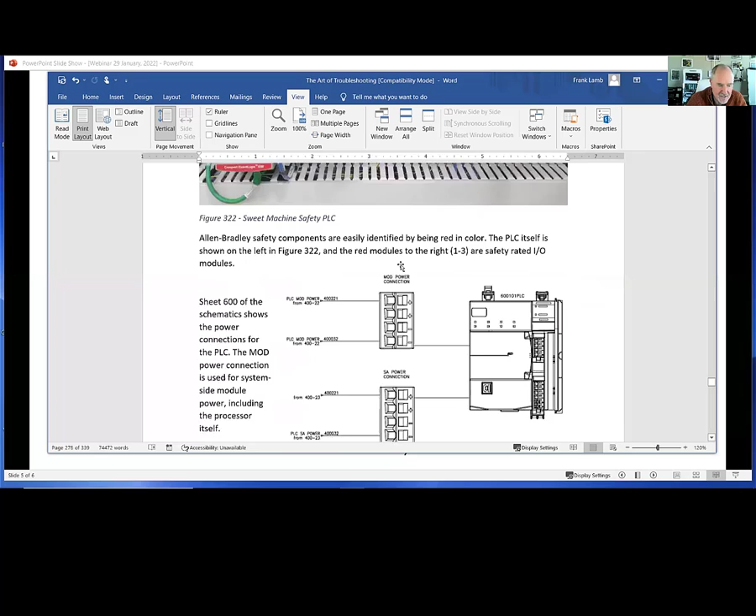And then I go through line by line what page everything's on, because the intent is if I'm teaching this class in person, I'm going to hand the person a full set of schematics for the Sweet machine. The Sweet machine has a robot in it, a safety PLC, and lots of different connections. These are safety connections, so I go into pretty good depth on how the safety connections work, how the bus works in the background, relating it directly to the electrical drawings.

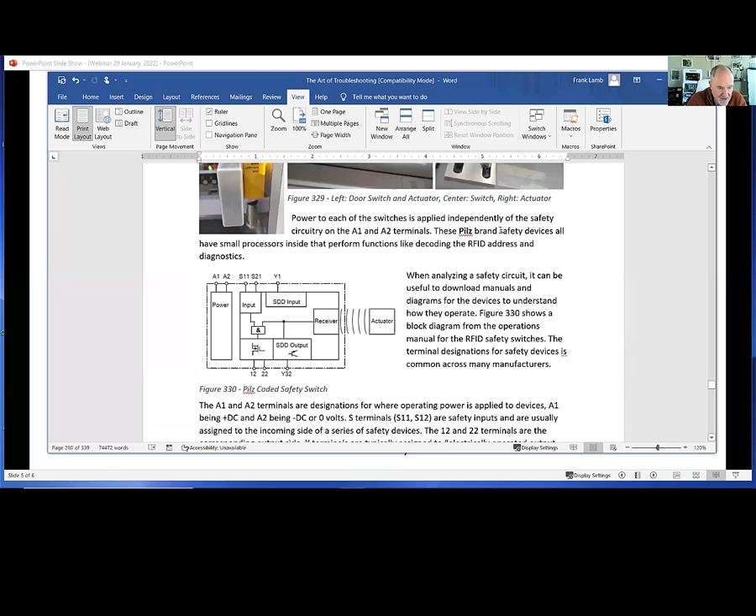And it goes on and on, right? And then I talk about the safety. This relates back to the safety systems that I mentioned, how safety systems work. We talk about the OSSD functions in Pilz. Pilz is a very common use maker of these safety devices.

And it turns out these also are smart devices, right? It carries more than just whether it's on or off. There's actually a microprocessor in here. This is all RFID. It recognizes only its own taught target, so you can't just use any target with this. And then I mention all the safety switches in this machine.

Go start getting into the safety circuits. And this safety circuit is pretty complex. It has a whole lot of wiring associated with it. So I go page by page, dual channel.

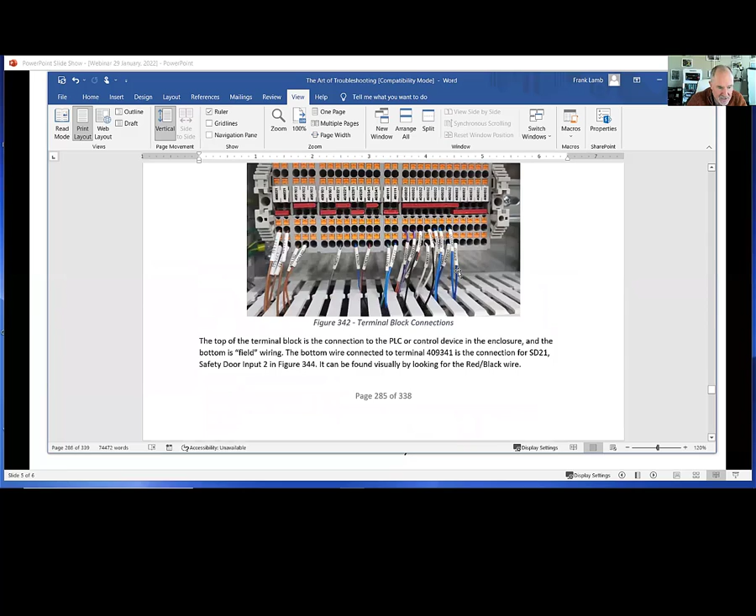And this machine's not actually all that big, surprisingly. It's got a robot in it. You talk about the cable glands, talk about how things are wired into the safety circuits. We're only into the safety part yet. I haven't even gotten into the IO here.

Then we get into communications. There's lots of devices on here. They all talk to each other, cameras, etc. This is a web camera. It's kind of a neat feature that NTH puts inside all their machines. They use web cameras to monitor what is happening inside of the machine. You can actually go and bring up archived video and watch what the machine's doing from inside itself. You can look down the conveyors and see the pucks that came by and things like that.

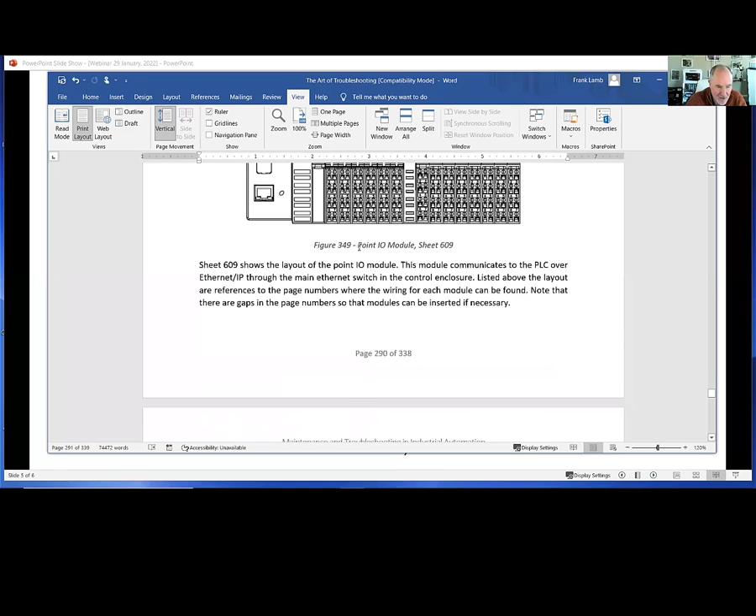Talk about Point IO, which is an Allen Bradley product, right? How does Point IO work? And then start, stop buttons, that kind of stuff. So you're seeing actual pieces of the machine here, pieces of the panel.

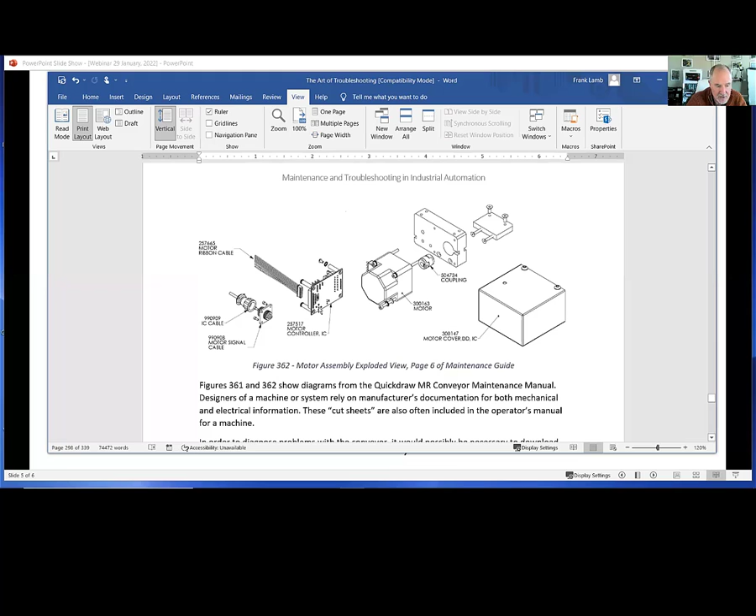There's a robot, some servo stuff, how to take this apart. This is an integrated motor. This is documentation you find in the actual drive documentation. So if you needed to work on it, that's the drive. It's an integrated drive, but it explodes into this, right? So you can see the motor and the controller, everything all built into one. How to trace this to different parts of the schematics.

Then I go into pneumatic schematics, talk about the valves and how to manually actuate them, and talk about how the controls fire those valves. They're not directly wired, that's all done by communications. There's a little more schematic diagrams. Ethernet coming in, actuating things.

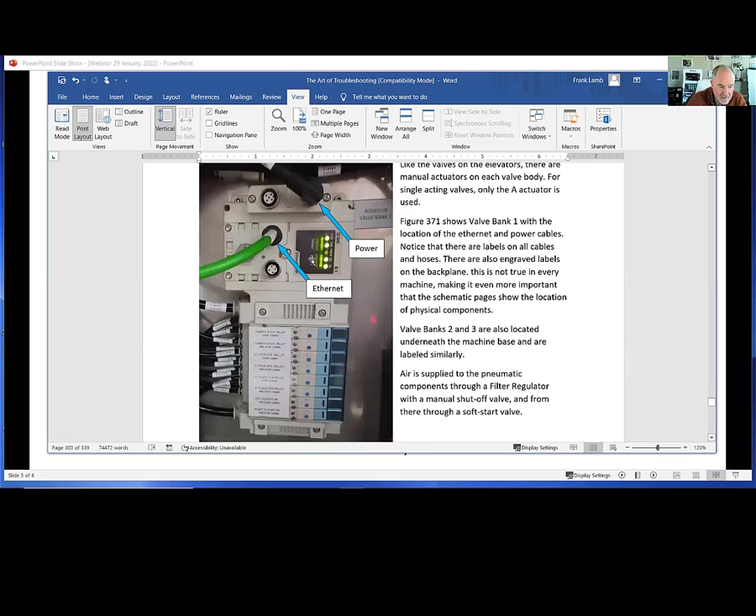Where does the air come into the machine? Where does it go from there? It goes to this nice little FRL and pneumatic shutoff. And that's about how far I am right now. And then I start getting into software, and haven't finished this yet either. So this is at the end of the book, really just talking about some of the different tools.

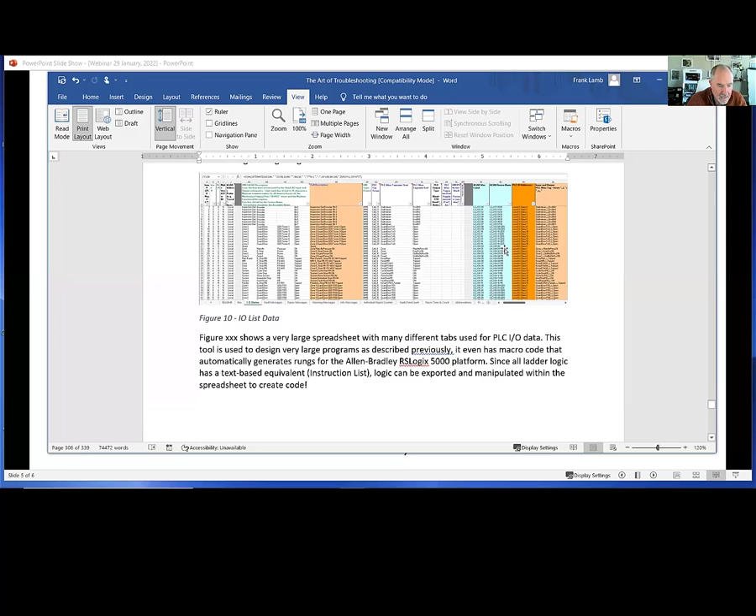This is all Excel here. Right? You can use Microsoft Excel to build your own auto-generating Excel spreadsheets that will generate code for you. You can take the IO list and generate the software. So that's a lot of what this is all about here.

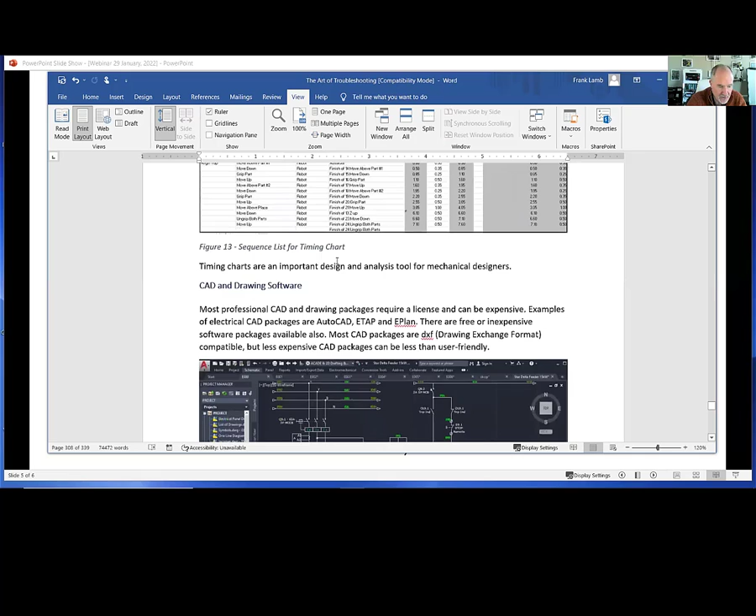Timing charts. You can make timing charts out of Excel. That's what this was. This is a timing diagram. You fill in the times and it actually builds the timing diagram for you. Then I start talking about CAD, and again, taking pictures, solid three-dimensional CAD.

PLC software, I'll go into a little bit of that, have some pictures in there. Simulation and emulators, that's kind of an important thing. And then at the very end, again, I haven't finished all this yet.

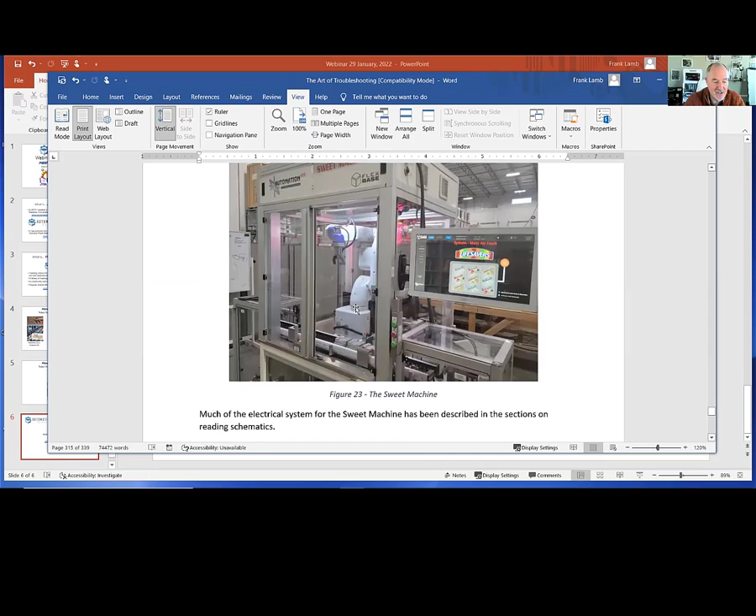But they use something called a FlexBase, which is what they use to build all their medical device equipment. They stack these things together end to end, and you can use 100 of these in a row, and it will pass parts from one to the other and do all its material handling internally. Each little base has PLCs all talking to other PLCs. This is just kind of a neat thing to show what a lot of these do.

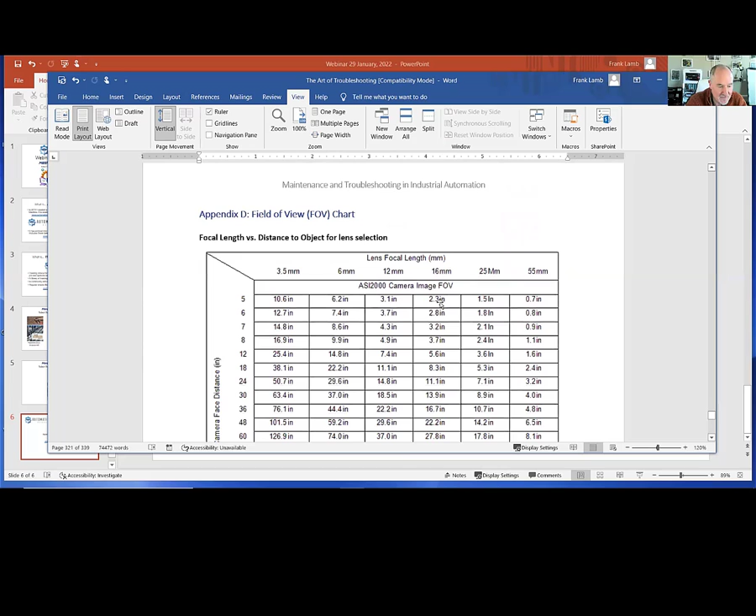Then I have some handy charts in here, things from my old books too, ampacity charts for speccing circuit breakers and overloads. It gives you wire sizes versus ampacities so you can spec things. Resistor color codes, good simple stuff that's sometimes hard to find. Field of view for vision systems, to specify the size of lens you want depending on how big your object is and how far your camera is from it.

ASCII tables, I use this a lot of times for exercises in PLCs to take apart ASCII code. Then I put all the exercise answers in here, so people can razor these out of the end of the book, and I have to keep up with all this. I'm not done with the book yet, but I still have I think 330 some odd pages of stuff in here.

That's what this troubleshooting book is about. I mentioned some of the different types of troubleshooting and things that are in here. It will be a good book. I actually plan in the Automation Academy to pull parts of this book out and put them in the library, so there'll be a whole section on machine vision or whatever. NTH is kind of supporting me in this, so for their courses, I'll pull this section out and put it in their 102 course. I'll pull the understanding schematics and documentation section and put it in their 104 course. That's kind of where all this comes from, that's how I'm organizing it.

But that is pretty much a look at everything. I've done my hour today.

I can see that Dan's on here. I don't know if anybody else has come in, I've just been talking the whole time. Yeah, we got somebody else on too, let's see who all's here. Al Abrams, oh my gosh, there's a name from the past. Al and I used to work together, I want to say 25 years ago. It's been a while. It has been a while.